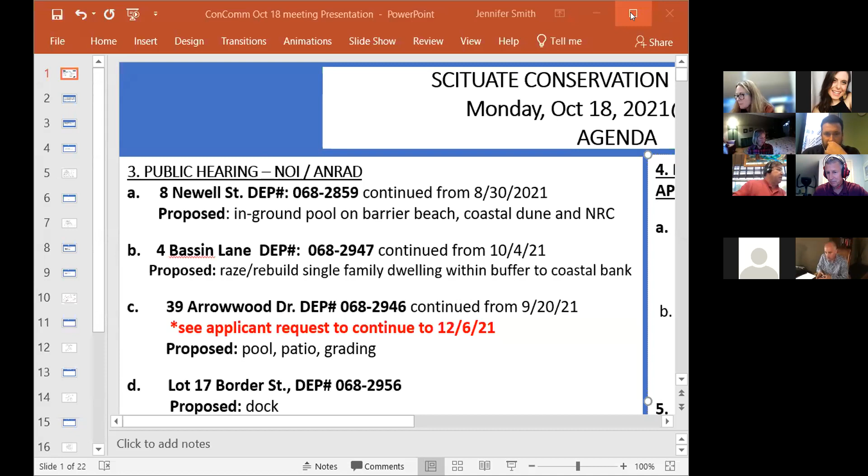Good evening. This is the conservation meeting of Monday, October 18th. For our procedures, on June 16, 2021, Governor Baker signed into law an act extending certain COVID-19 measures adopted during the state of emergency. This act includes an extension until April 1st, 2022 of the remote meeting provisions of his March 12th, 2020 executive order suspending certain provisions of the open meeting law. You're hereby advised that this meeting and all communications during this meeting may be recorded by the town of Scituate in accordance with the open meeting law.

So we need to get an acceptance of the agenda with a couple of additions. When we're all done, I wanted to update you on where a couple of trail improvements and whatnot have been done. Jen Foley, did you want to speak about the Driftway Park piece, or do you want to chat about it some more before we bring that up?

Yeah, we can chat about it. That'd be great, if we have time, if Penny's not too anxious to get off the meeting, we'll give it a shot. I'm very content. I ate my dinner, I had my water, I had my chocolate, so I'm all set.

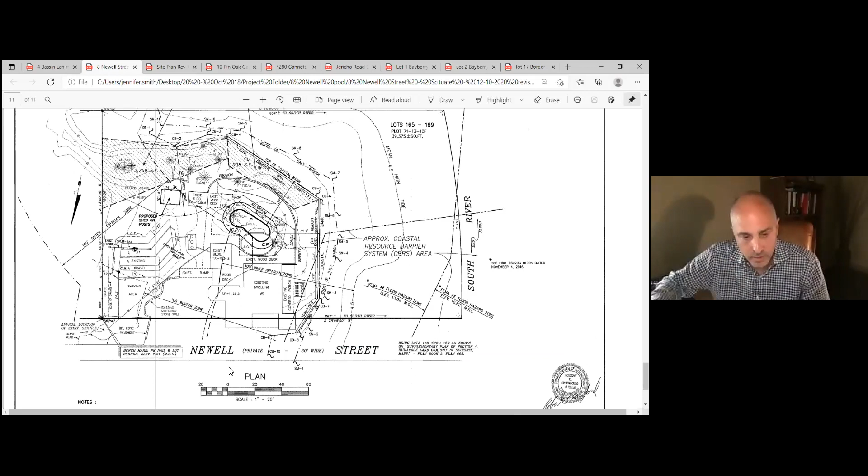Hey Frank, how are you? Good evening, Jeff. I believe, I just want to make sure that John is here, and I know also Chris Wynn, who's my client, probably needs to be promoted if he's not already.

But the thing we'd like to do, Jeff, if we could, is kind of bring this as new news, new information. I think the commission's pretty familiar with the site, so we have a fair number of things to cover tonight. So if we could not do a lot of rehashing, that would be great. Yeah, I'll just kind of synopsize without really getting into any crazy detail, Frank, if that's okay. Until Penny tells you you're done. Okay, yeah, 5 minutes, Jeff.

Right, Penny, thanks. So I'm here with Chris Wynn, who's my client, who you guys know. John Zimmer hopefully will be joining us in a few minutes. Our last substantive hearing on this was May 17th. Since the last meeting, Mr. Wynn submitted a bit of an analysis, kind of comparing this project to some other projects he felt was similar in and outside of Humarock.

In addition, we hired Pat Brennan, who I believe the commission's familiar with, to analyze the proposal for purposes of determining whether a pool is a structure by FEMA standards such that it needs to be elevated, and whether the proposal would have any adverse impacts on coastal storm flowage. Pat addressed that. In addition, I submitted a memorandum addressing some of the legal standards that are at play.

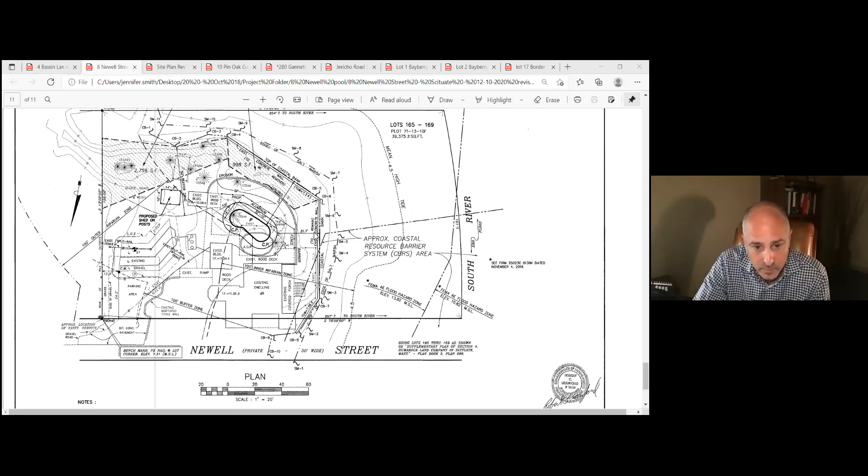But I'm happy to have Mr. Wynn address the commission. Frank, you've had an opportunity, well, all of you have had an opportunity. I just want to make sure you've all seen Mr. Wynn's submittal. I'm not interested in wasting anybody's time, but if you have any questions about it, or if you haven't seen it, please speak up. I'm sure in a 3-minute period you could probably review the whole thing. That's fine. Again, he's an applicant and a resident and he has the right to address the commission. I'm just asking that we don't repeat a lot, that's all.

Chris, anything new to add or expound upon that I haven't covered? Well, yeah, thank you, folks, I appreciate everyone's time. And of course we've had several meetings, so I appreciate everybody's time across that duration as well. Just in summary, the letter was intended to recap where we started and where we ended up from the last meeting. And when we first purchased the property, we did consult with the commission, and the initial guidance, to my own ignorance of the process, was to submit a drawing.

So we took from EET, who's not with us here on the call, the Bob Crawford had the original plan. And as you may recall, we did just put a rectangle, like here's a rectangular pool, not understanding that was going as a starting point from all of that. I think the key thing to note is that there are several pools in Humarock, and there was also a project that was approved this past spring on Peggotty Beach that has substantially the same characteristics of coastal flowage, barrier beach, proximity to vegetated wetlands and other components there, as well as some existing projects that have been rehabbed over the years in Humarock. So that was really the summary of the analysis.

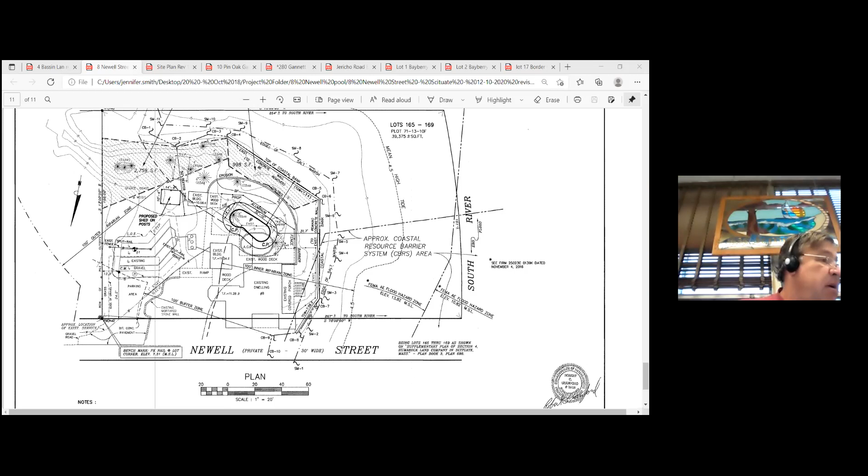Thank you, Mr. Wynn. Before I go to members, Amy, you mentioned a pool at Peggotty Beach. Is that in the same resource area? I just don't remember a pool at Peggotty. No, it's up on the cliff. I want to be clear that's not the same, because we want to maintain consistency. So the one on 58 Crescent Avenue is up on the cliff, but I think the one Chris identified was the one right on the beach itself, behind the public portion of the beach. Correct me if I'm wrong, Chris. Yeah, that's my belief as well. 56 Peggotty Beach Road, that was the one.

Okay, I'm going to look that up. On the notice of intent, it was the item immediately preceding ours at one of the spring meetings, I don't have the date in front of me. It was defined in the notice of intent as a pool in a Barrier Beach, subject to coastal flowage and all the other conditions we've been discussing with respect to ours.

Okay, thank you. Amy, do you want to speak to that, or go to members? We've done both. I don't recall what Chris is recalling. I don't recall a project in coastal Dune on Barrier Beach that's a pool, and each review is a brand new review anyhow. But I think that address you're going to find is actually in the coastal bank.

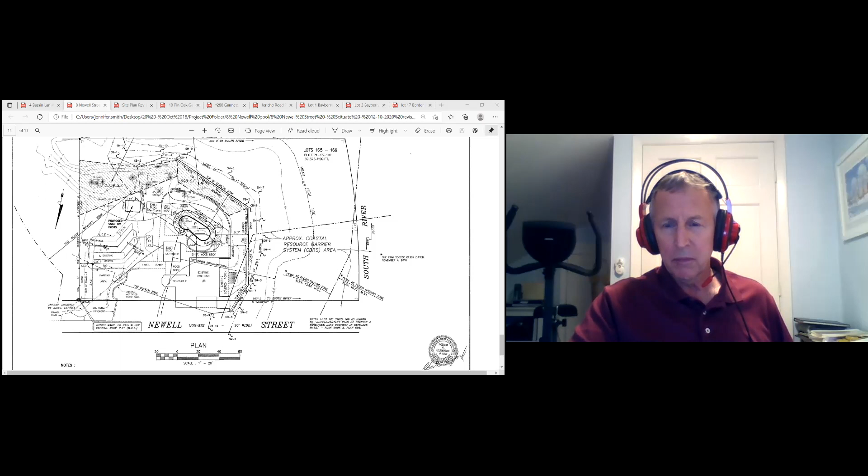Well, just before you do, so I've been out to the site. I've heard Mr. DeLisi, I've heard Mr. Wynn, Mr. Zimmer, and I appreciate all the work they've tried to do to make this possible, and people trying to improve their property. And we always seem to get into a bind between, or in my mind, sort of a compromise with different projects. We have the improvements that they're willing to offer on a site that's pretty degraded. But in turn, they're looking for some relief to put something there. And we've had this discussion back and forth.

We tried to get CZM to go to the site. It didn't work out, but I know we've discussed this a number of times with them. And I think maybe Amy, CZM is sort of an advisory group, but it's more of a DEP regulation. And maybe you just want to cite that if you can.

Frank, did you just say it was a DEP regulation? Well, a DEP ruling or regulation on what can be in and out of a zone, if I'm correct. I don't have the regulations in front of me, Frank, but we're talking about the standard for barrier beach and coastal dune. It's strict that no vertical walls are allowed, because you're not gonna let a wall or a pool, whether it be above ground or below ground, allow the dune to shift and migrate like it's supposed to do. And you don't have the authority to override the DEP rules with your local regulations. You can have local regs that are more stringent, but they don't override the state, so this is actually a state rule, and it's protection of interests of flood control and storm damage prevention.

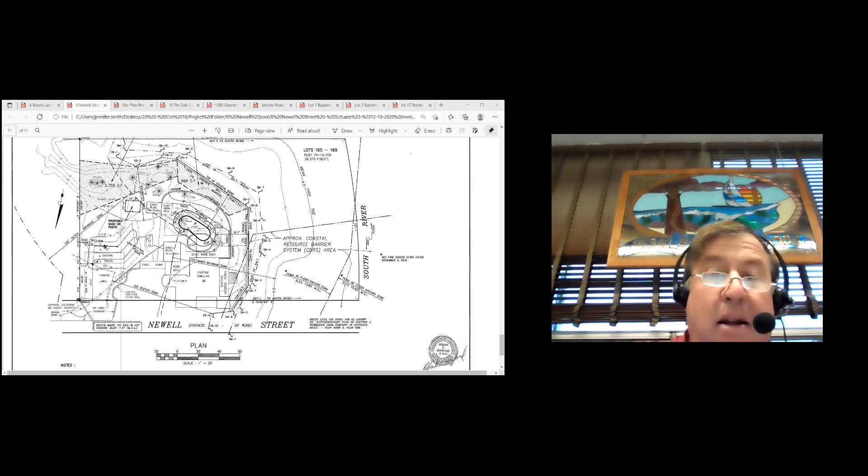I think anytime you have a project with varying discrepancies, getting on, whether it's Mr. Zimmer or Attorney DeLisi, if this were just something that could be permitted, obviously there's not a need for that. But you have much more extenuating circumstances on a site that, although before your time, the previous owner ignored a lot of the regulations. So you've got a site that certainly needs to try to get back into some sort of compliance. And I think the commission's goal in a lot of cases is to work with folks. There's a number of other items at that property that are not in compliance, but what you're asking for is the pool. And we talked about different ways and whether that would be feasible if certain work were done.

I'm not trying to get away from this, but the house that's on Piers on Collier, that's almost a box, does that house have a pool in it? It's up on the second floor. So it's an elevated pool. It's on the second floor of the house. It doesn't touch the ground.

Well, it leaves a lot to be desired, that's for sure. Sure. Well, Frank, I appreciate the thought of looking into what some of these other projects are.

One of the things that Patrick Brennan from Amory Engineering made a distinction of in his letter is there's a FEMA definition of structure, but the word habitable seemed to have been omitted from a lot of the discussion here. A habitable structure, according to Pat and other experts who've provided guidance, is one that requires the elevation, but a non-habitable structure does not.

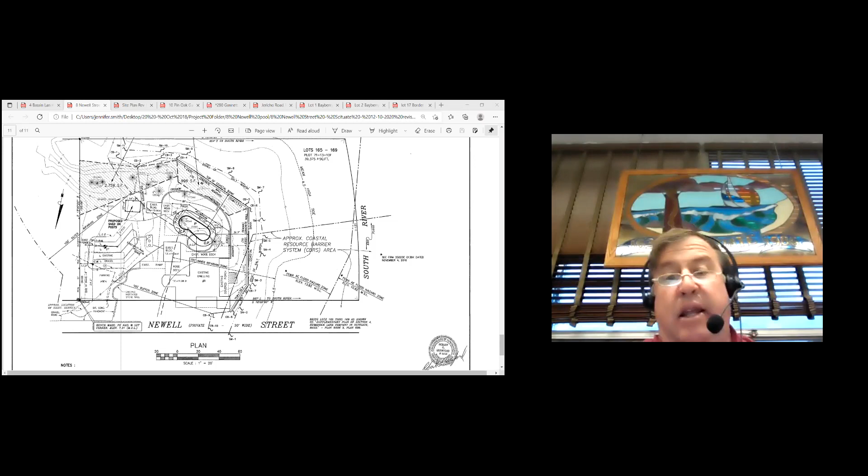I think the document that defines it is attached to Mr. Brennan's letter, so you can just take a look at that. You should be able to see that. And the only thing I can add, and I think we're probably at our end for discussion, but...

If you recall, all that went on with regards to creating a dune to protect parts of Humarock - we had multiple discussions with lots of different agencies, FEMA, CZM, all those different agencies, and we could not build anything other than a dune to protect Humarock. That was the consensus from all those agencies.

When it was talked about whether a revetment or a seawall or what could be done to protect those houses, we kept circling back that the only thing that could be done to protect them was some form of a dune.

And that's why I wrote the letter to basically say, your standard is no adverse impact. When you look at this as a whole, there's not even a question that the circumstance with the proposed in-ground pool versus the existing partially above ground pool, along with all the mitigation, is clearly a better situation. Clearly.

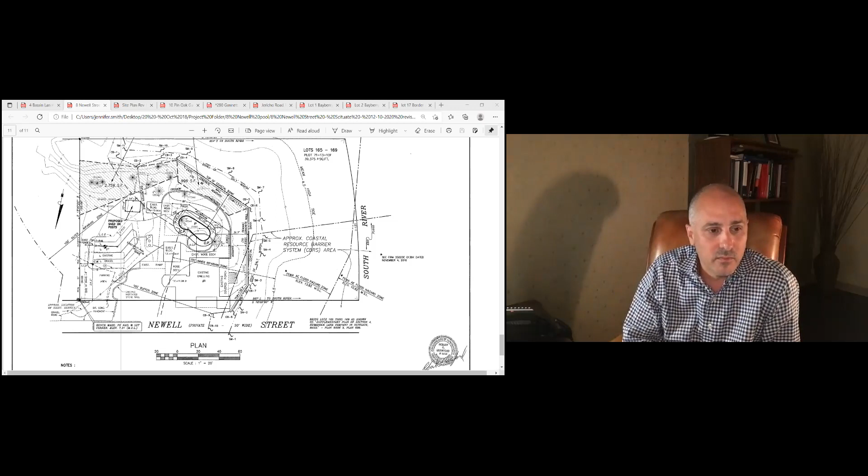It's exactly what your regulations are designed to protect. So that's why I encourage the board to look at it through that viewpoint.

And I get that, Jeff. And just as when we look at houses in Humarock and we allow people to pave, we only allow them to pave in places where there was pavement before. So for Mr. Wynn to come back to the commission and say, well, I've got an above ground pool...

Now, a lot of those driveways in Humarock were probably never conditioned, nor do I believe this pool was conditioned. Never. But I don't know that we've ever looked back that far, but I don't think if you had found it being conditioned by a Concom, I think you would have given it to us.

Yeah, I mean, I'm not sure you guys existed in the early to mid 80s, so there was a commission. I was a teenager driving by on my boat at the time, and thought how cool it was that these people had this property. But that, sure, yeah, no I get it, Mr. Wynn, and I do appreciate what you're trying to do here. So, all right, I do think we've given this as much time as we can.

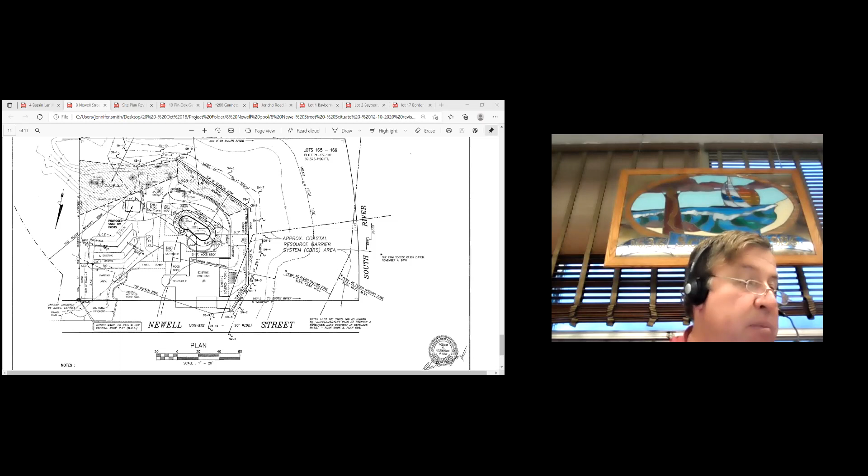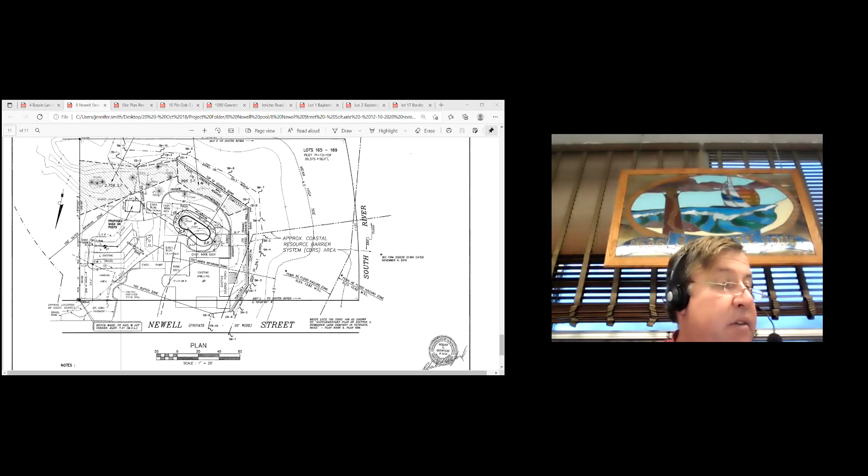So I'm looking for a motion, I guess, at this point. I make a motion to close. Do I have a second? Second, from Jen Foley. So all in favor? Doug? Yeah, I think we should close. Yep, okay. Andy? Yes. Brendan? Yes. Frank? Yes. Okay, all right, moving on, we've got a lot of things to think about here.

Okay, thank you very much. Thanks, Jeff. Mr. Wynn. Okay, Bassin Lane, 4 Bassin Lane. And so we met at the site, and I think we have a revision. I don't think, do we need anything else on this to close? Anybody want to speak to this after our meeting? Yeah, you do, you need to, we need to have more. I'm looking for Jeff Bassett or Greg or James. I'll unmute Greg. Greg, good evening. Greg, hi.

Excellent. Yeah, for the record, Gregory Morse, registered engineer, representing K&E Construction, the applicant. As you know, this is a continued public hearing for the raise and reconstruct of a home at 4 Bassin Lane. Since the last meeting, we performed a site walk with CZM, as well as submitted a revised plan to this commission. The revised plan essentially addressed 4 things. The top of coastal bank delineation was changed as a result of that meeting with CZM. We previously had it further to seaward, but CZM suggested we move it to the top of the embankment. So we've revised that on the site plan, and accordingly, the 50-foot and 100-foot buffer zone to that bank.

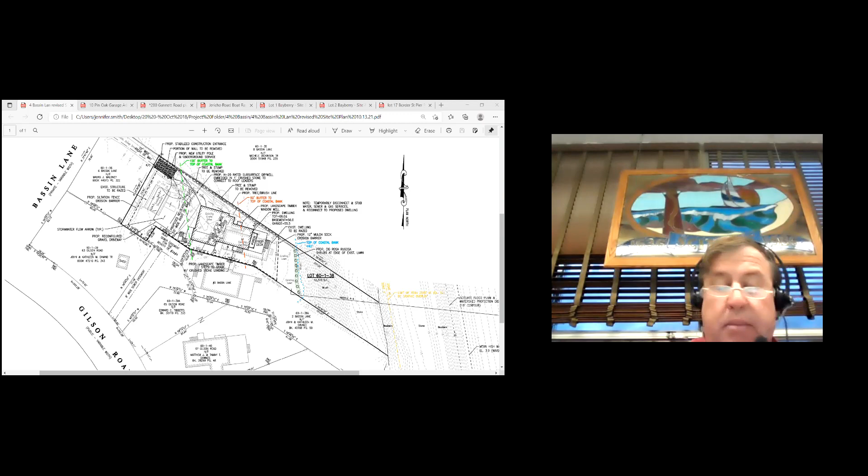Thanks, Greg. Penny, Amy, do you want to comment after that? Yeah, sure, real quick. So like Greg said, we indeed did have a nice site visit with two of the regional officials from CZM. And one of the things we observed, and the reason why the coastal bank was moved up, was that there were pretty significant sloughs on at least one side of the property, on the right side, which we also have photos demonstrating, you know, when that happened, from an abutter. And also that part of that there's a double revetment down on the bottom, and that the coastal bank is also primarily vegetated with Japanese knotweed, which is not entirely deep rooted. So that's to be noted.

CZM definitely was concerned about the cliff. That was my take, that they had some concern - it's happened and it happens without notice, so it could happen again. Any vibration or hard overdigs for a foundation should be minimized or avoided.

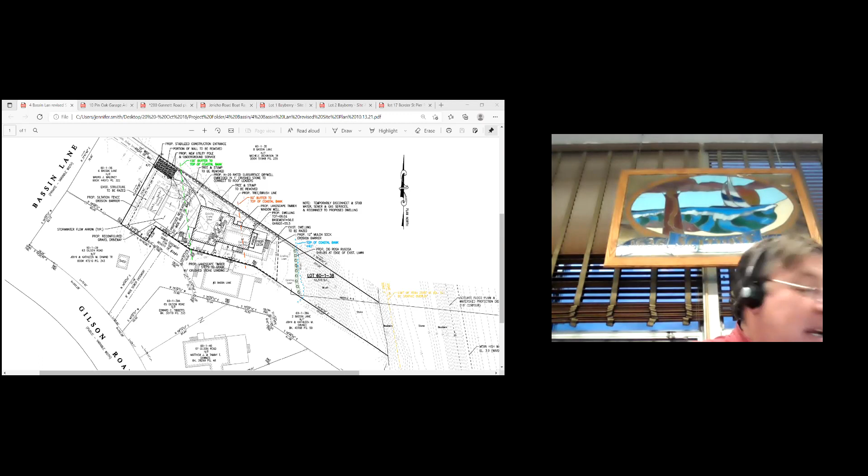Okay, Andy? No further questions for me right now.

Okay, Jen? I'm thinking through the land court stuff and how, without that being finalized - not to get ahead of ourselves - but we wouldn't want to close on this because that could have a material impact on the plans.

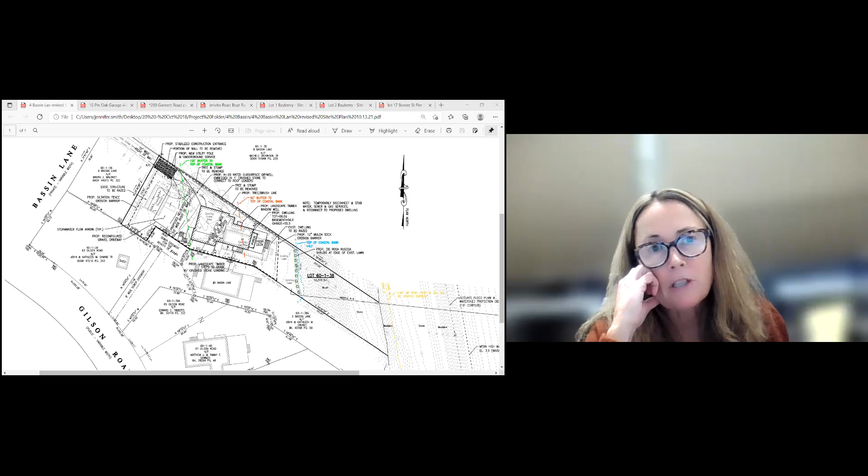Is that kind of correct at all, Amy, or what's the impact on it? I think that it shouldn't stop us from closing, but if plans change as a result of the outcome of the court case, then they would have to come back to us. Got it, okay.

Penny? You were there? I was out there too, and I'm glad to see the Rosa rugosa get rid of the knotweed at the top of the cliff there, which will be good. And the erosion barrier - I think, Frank, you made the point.

It's very, very important that no vehicles go beyond that, anywhere near the edge of the cliff there, that they stay on this side of the erosion barrier. But otherwise, I think it looks good. I like what they've done. And I thank you, Greg.

You're welcome to expand on that a little more. If you wanted to potentially add a condition, we could put an orange construction fence along that side of the erosion control barrier too, as just an extra protection.

Yeah, we just don't - I know Frank was concerned, and I was too, that no vehicles, not one truck turns around past that erosion control. That's almost like sacred ground. You can go out there and plant, but other than that, nothing heavy. So I think that's a good idea to put the fence up. Thank you.

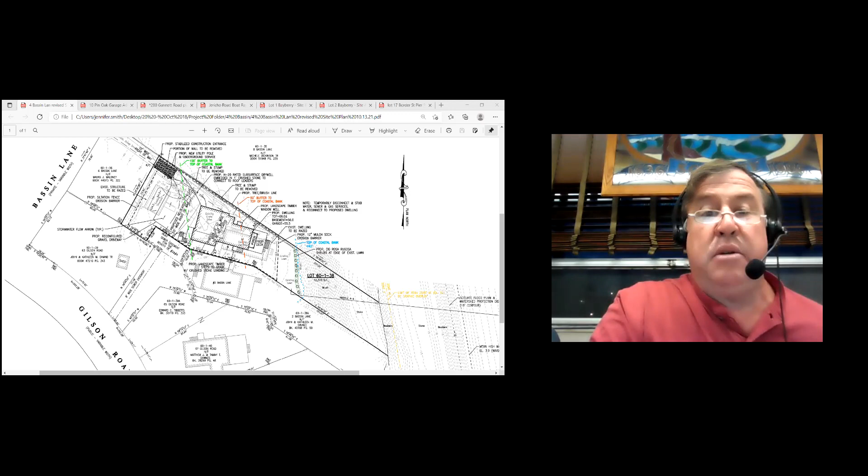Or, I mean, it's a dirt foundation, there's no foundation underneath it, but that's fine, as long as you're aware of it. Yeah, no, again my observation was a concrete block foundation, but I don't know about the entire foundation, just the area we walked around, that's what I noted.

The piece of the easement, so we can't condition a project on someone else's property, but just explain the easement to me, Greg, or to the commission. Sure, so there's a right of way that comes onto the property, which contains access rights.

It also has utility rights in it. My client has filed with the land court to relocate that right of way and easement. That would include relocating the physical utilities to within that new location. We depict that new location on the site plan. So while there might be a temporary cut in the power to the house, it would certainly be reconnected, and we'd certainly be talking with the neighbors and discussing that when that work takes place. But no work that I see would be required on the neighbor's property to accommodate that. It would all be done on this subject property.

Okay, can I interject here? As far as there's gotta be work done on my property, I have underground service. I don't wanna chew on a bone here, but that doesn't answer my question, as far as I have to have power to my meter. That's gonna be dug all the way up. I'm missing something here.

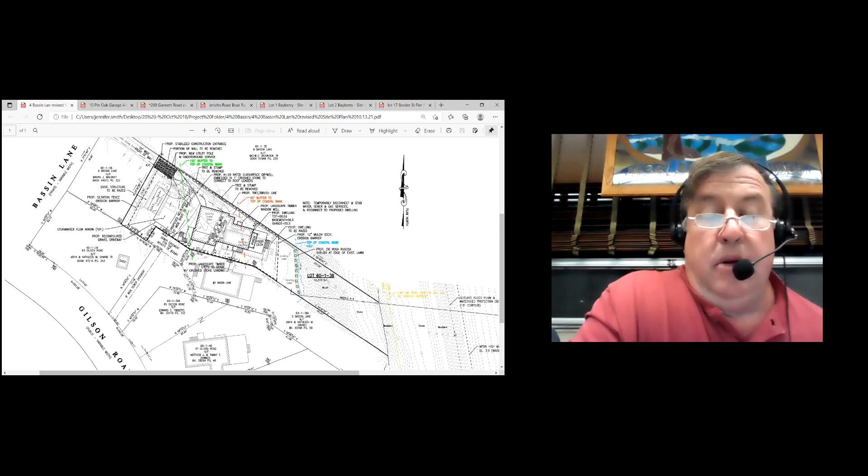Does that help? No, it explains what's going on, but I appreciate it. It seems like, Greg, at some point it would be good for you to be talking with the people that are building this, to work it out.

Yeah, I'm retired and I'm at home all the time, so... I'm not saying anymore, okay. All right, well, no, we want to make sure we address those pieces, and Frank, Greg said the electrical is gonna come through the proposed right of way.

So that goes through, and that comes into probably about 50 feet from where my electrical box is. I'm not assuming, because I know better, how is it gonna get from my property line to my meter? Greg: it'll get cut and redirected right along the property line between the two properties. Okay, so they're gonna dig it up and bring it up to my meter on my property?

I don't think they have any intent to come onto your property and dig it up to your meter. I think their intent is to cut it at the lot line on their property and then redirect it to the power source, not to come onto your property and touch your electric meter or dig up your lawn in any way. Okay, that explains it.

So they're gonna redirect it down to the right of way. Correct. Okay, so thank you. Okay, thank you very much.

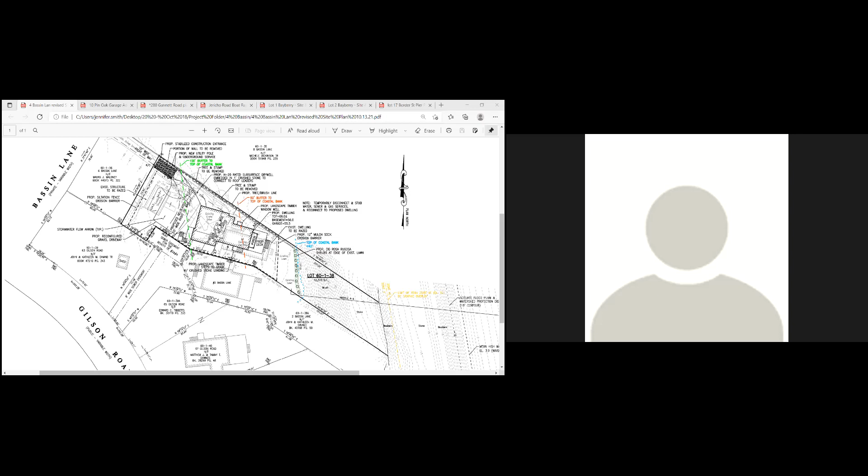Okay, well, unfortunately, the purview of our commission is really to deal with the Wetlands Protection Act and the drainage, things like that. I could see it's a tight site, just going in and out with a pickup or a van, so I know that they're going to have to work at that. I think they're aware of what they have to do there, and if it's the only access into that property, I'm not sure what their alternatives would be other than just to be real careful with that.

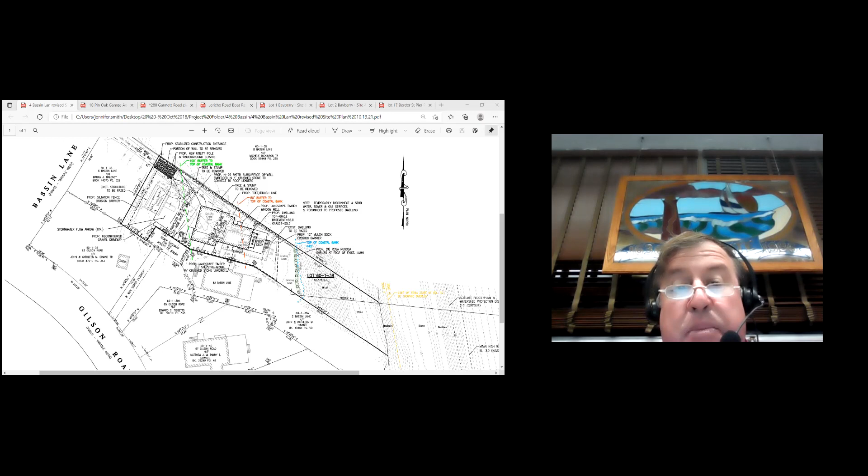I don't know how else to answer your question. They have to put down a stabilized entrance, and we want to make sure they're not bringing mud and whatever. I get your concern, but I got to believe they're fairly aware this isn't going to be an easy project. Okay, thank you.

Do we have anybody else? Okay, do I have a motion? I make a motion to close on 4 Bassin Lane. That's Penny. How about a second? I'll second it, Doug's going to second. All in favor? Jen, yep. Andy, yes. Brendan, yes. Frank, yes. Thank you.

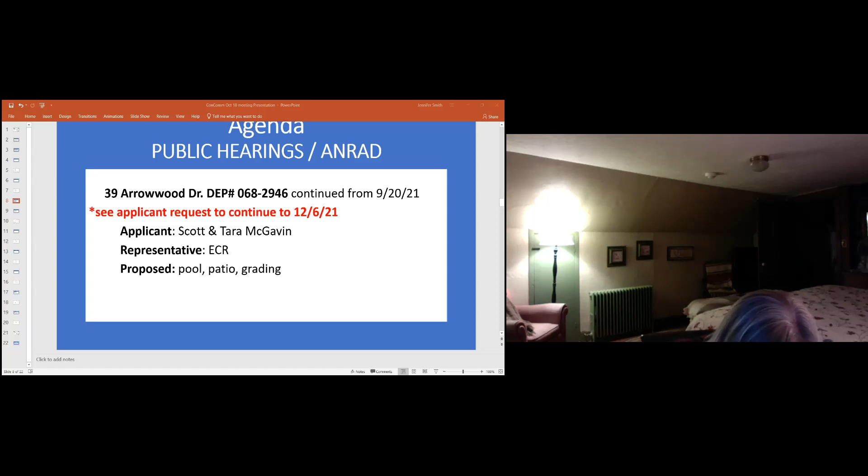39 Arrowwood, we got a request for continuation. Motion to continue 39 Arrowwood to December 6th. We have a second? Second. All in favor? Jen, yes. Andy, yes. Brendan, yes. Frank, yes. Great, thank you.

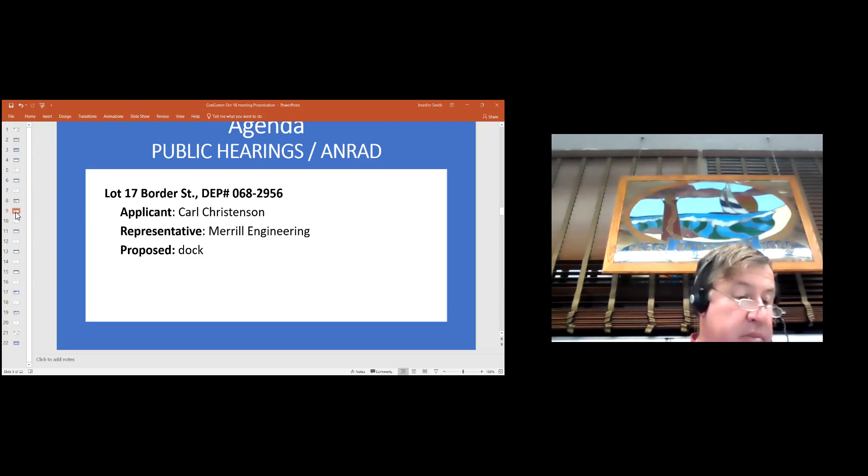Lot 17 Border Street. So I'm assuming you're gonna open it, Doug. Oh, we need to open that one, and Doug's gonna recuse himself from that. Why? It looks like the representative is Merrill Engineering. Oh, that's a good reason. Unless you think you can do that, it's up to you, Doug. No, I should probably. Who's the representative? I'll go by that. Dana. It's Dana. Oh yeah, I better recuse myself on that. Okay.

So on October 18th, 2021 at 5:30 PM, the Town Hall, Scituate Conservation Commission will hold a wetlands hearing under Chapter 131, Section 40 of the Massachusetts General Laws and Section 30700 Town of Scituate Code of Bylaws regarding the application of Carl Christenson for work related to the construction of a pier at location Lot 17, Border Street, Scituate. Abutters and other interested parties are invited to attend. Information and access to the virtual meeting is available on the agenda posted on the town website.

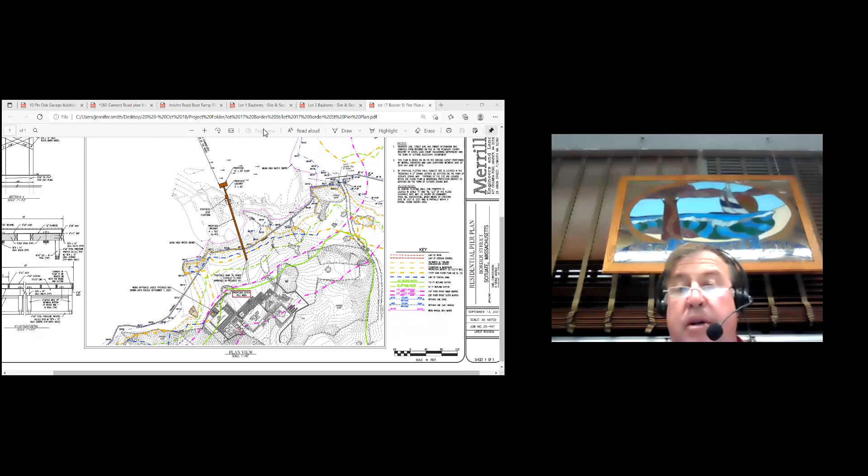Good evening. Frank, I'm gonna unmute Dana Altabello. Dana, you can let us know if you need anybody else to unmute too. Sure, thank you. Actually, the applicant Carl Christensen and his attorney Adam Brodsky are both on the call as well. Okay, give us what you're gonna do. Dana, do you want to briefly explain the project?

Absolutely, thank you. Good evening, my name is Dana Altabello. I'm with Merrill Engineers and Land Surveyors. I'm here with the applicant Carl Christensen, as well as his attorney Adam Brodsky. This project is located on the westerly side of Border Street, on a property that was previously a portion of 143 Border Street. The property has over 900 linear feet of frontage along the Gulf River and consists of approximately 17 acres. Much of the area along the river contains wetland resource areas associated with the river. The wetland resource areas in this part of the property were reviewed recently as part of the house construction associated with SE 68-2912, which was approved previously earlier this year.

The site does contain bordering vegetated wetlands, salt marsh, FEMA flood hazard area, as you can see shown in orange, and the riverfront areas are both shown in purple as you work your way into the site. The 100-foot and 50-foot buffers to the top of bank are shown in green as you work your way into the site.

The applicant wishes to construct a water-dependent pier with an elevated timber walkway, an 8-foot by 6-foot platform, and a 3-foot wide aluminum gangway with a 10 by 20 float at the bottom. The 4-foot wide elevated walkway is approximately 150 feet long. There will be 2 by 6 decking along the walkway, spaced 1 inch apart to allow sunlight to penetrate the ground and salt marsh below.

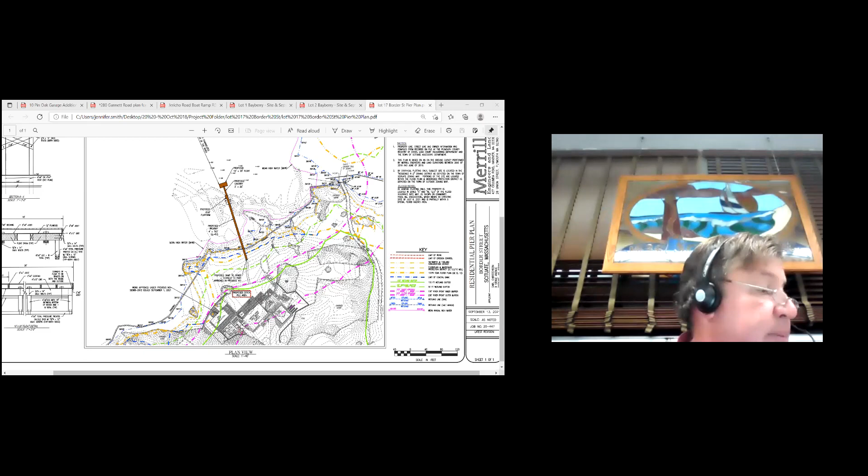Is that dock at the end, is that removable in the winter or does that stay out there all year?

The float itself would be removed in the winter, and the gangway is usually brought up on top of the pier itself, secured up there so it's not dragged across the salt marsh or anything like that. And the float is floated down to a boat ramp, I believe was the intent. Carl might be able to speak more definitively on that, but I believe the intent was to head down. I'm not exactly sure where, but I think it was to be removed at a boat ramp or something like that, where it would have less impacts and easily could be gotten out of the water.

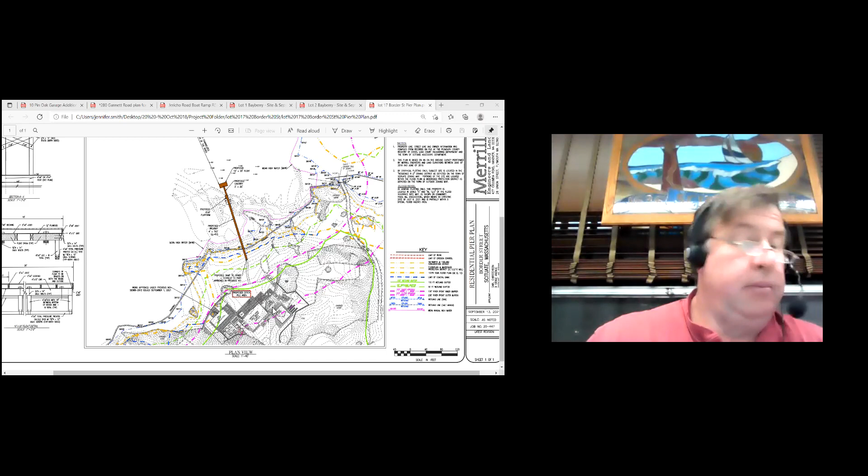I think someone may need to unmute, Mr. Yeah, I just asked him, do it again. Okay, there we go. I think I'm unmuted now. You got it.

So the intent is Keith from Harbor Moorings is going to do the construction of the dock of the pier, and the intent is to have him remove it every year. And I think he does a number of similar projects down on the river, so he's very familiar with how to get them out safely and how to get it stored. And I have other places I can store it once we get it out of the water.

Okay, thank you. I know some people will bring theirs up on their property somewhere, and I believe we've had orders before where we don't want the dock or the float left on the marsh. If it's brought up onto upland or out of the marsh area, it's been okay to keep that on the property, but yeah, I don't want it on the marsh either.

I think the easiest thing is if you look on the right-hand side of the drawing, there's actually a cart path that goes down there. Get it out of the water, bring it up the cart path, and then there's a pole barn farther up near the main barn that I can store it in. That's my intent, so I'm going to talk with Keith to make sure that's all feasible and possible, but that's the plan. Great, thank you.

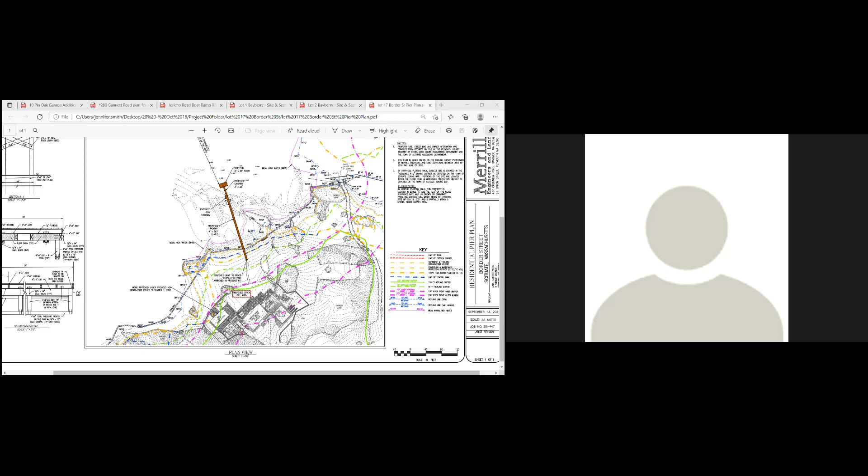Do we have anybody in the audience? Seeing none. Well, I guess we'll let you go on your journey. I think there's a few more steps in the process, but okay.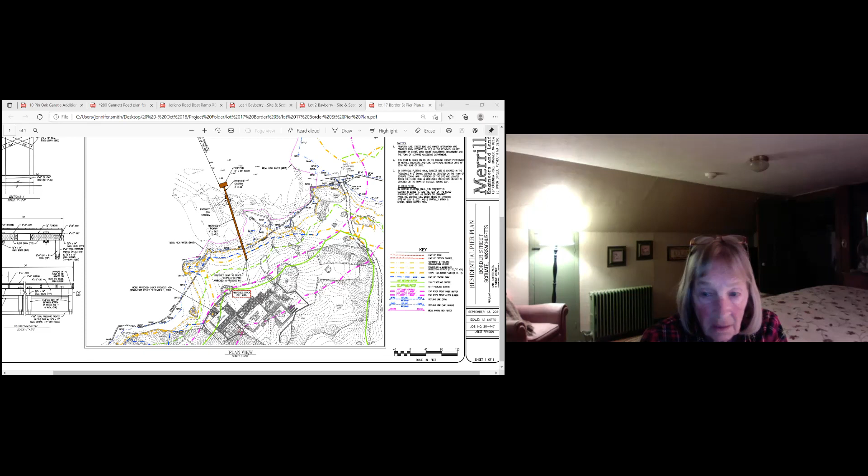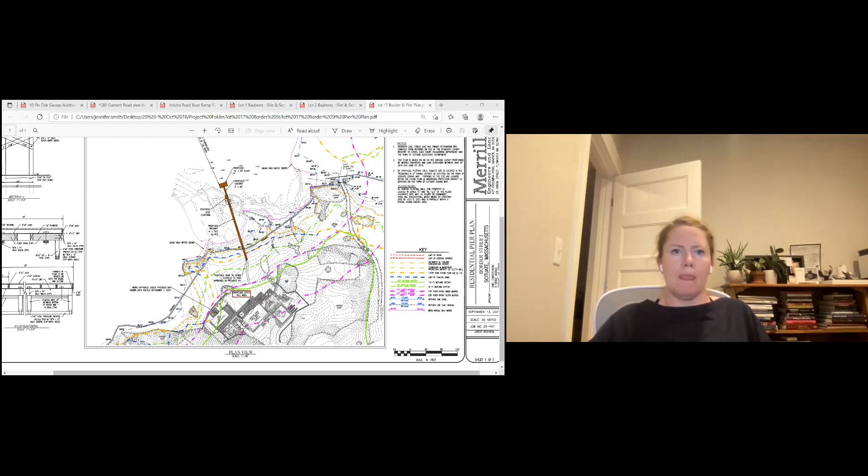10 Pin Oak Drive. On October 18th, 2021 at 5:30 p.m. in the Town Hall, the Scituate Conservation Commission will hold a wetlands hearing under Chapter 131, Section 40 of the Mass General Laws, and Section 30700 of the Town of Scituate Code of Bylaws, regarding the application of Daniel Kelleher for work related to construction of a garage at 10 Pin Oak Drive, Scituate. Abutters and other interested parties are invited to attend. Information to access the virtual meeting is available on the agenda posted on the town website.

Good evening. I'm going to unmute Greg, or I also see James, but I guess I'm going to go with Greg. So hold on.

Good evening, Greg. For the record, Gregory Morse, registered engineer, Morse Engineering, representing Daniel Kelleher, the property owner. This is a notice of intent to allow construction of a 24 by 26 foot garage addition and reconfiguration of the driveway at his property located at 10 Pin Oak Drive. This notice of intent is very similar - we filed the same exact project in 2018. The permits have expired, however, and the project was never commenced. There were no changes between that former approved project and the project before you tonight.

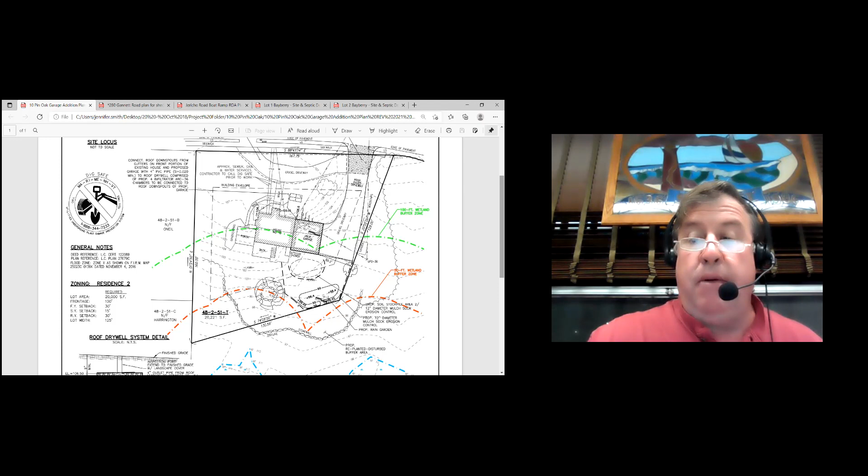Well, the special conditions basically were: the driveway is permeable, additional plantings should be installed per direction of a wetland scientist and the conservation agent, planting plan, and we do have the planting plan. The intent is to add diversity to the grass swale over at least 2 growing seasons. And there's an O&M plan, no runoff shall leave the staging, silt sock, stockpile area.

Just kind of like the general stuff. Testing of soil to make sure there's a minimum of 2 feet separation of groundwater, to confirm infiltration rate and further evaluate soil conditions. If soil varies, an alternative plan may be required. And then conservation posts.

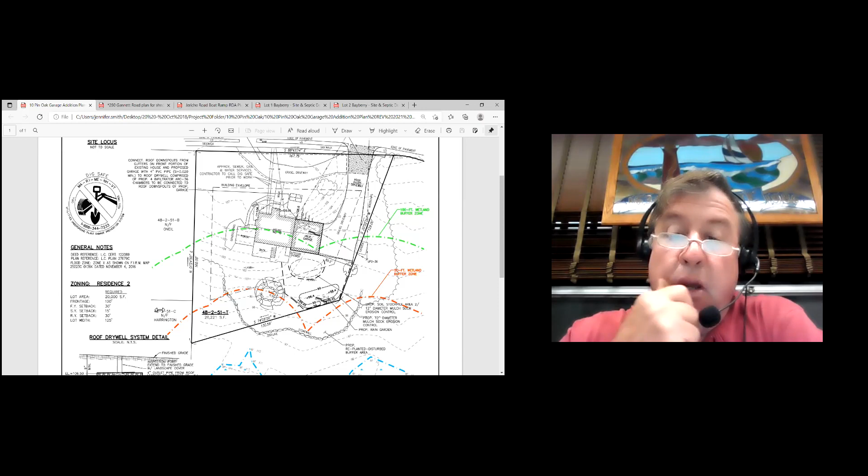Okay, I do remember going out with this. I remember meeting Pat, and there was some, I guess, inadvertent clearing at the time. We figured out where the wetlands line were, and I know they did stabilize some of that at the time, and then we had this hearing. It's too bad they had to circle back to this again.

But okay, we'll move to members. Doug? So the proposed replanted disturbed buffer area, Amy, that's already part of the orders that we would repeat, that has to be planted, and if it's already been planted, then that part's just done.

Yes, although I don't think it was. I don't think anything was done, honestly. But Greg, maybe you can help us with that. The barren soils that were out there were stabilized, but the shrub plantings were not done. Those would be done under the new order.

And the rain garden, that's already included in the order? That was part of the original order, and that would remain in this order. Yes. Okay, no, that seems pretty clear then.

Penny? No, I'm good. Jen? Yep, all set. Andy? I'm okay. Brendan? I'm good. Do we have anybody in the audience for this? No.

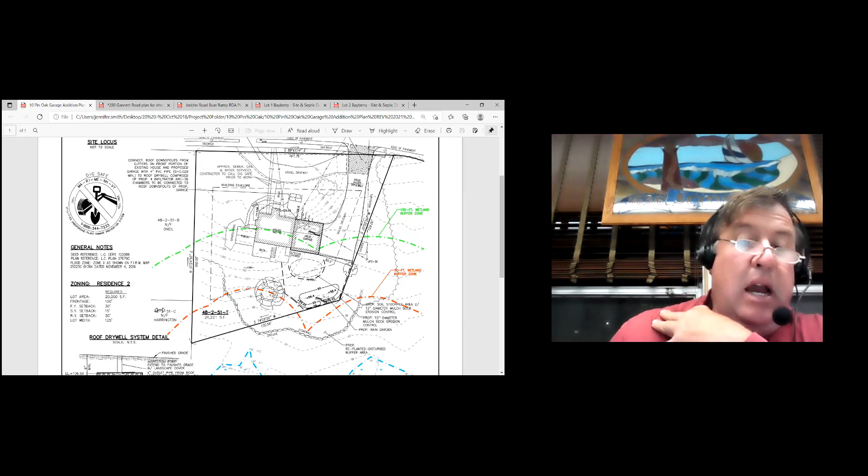So, Amy, do we have to issue another set of orders? Is that the plan? Yeah, actually it kind of reminds me of some projects you might be very familiar with that never got recorded. It's the same orders.

I don't think I'll change anything but the dates, really. Okay, so unless Greg, you think maybe... Yeah, Greg, maybe you can remind the applicant to get these recorded. Yes, I will. Get those into us right away.

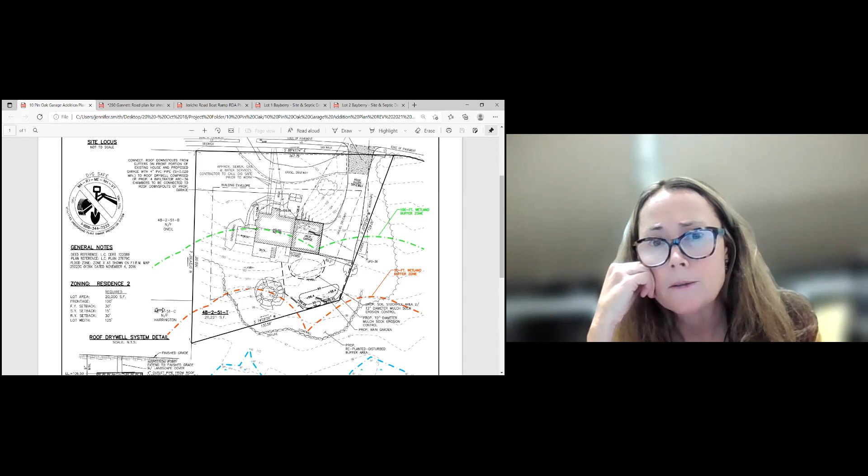Because I know the contractors never get their own project done, what's the most amount of time we can give him for the project? It seems a shame. 3 years is a good amount of time, and then you can file for a request to extend the orders. 3 years just never seems long enough when you're working on your own project. But all right, we'll start there.

And we didn't have anybody in the audience, right? Nope. So I'll take a motion. I make a motion to close 10 Pin Oak. And Amy, we don't have to redo the stormwater, right?

No, I think it appears that the stormwater would stand since the project is the same. I mean, I would like the plan to reflect the shed and be accurate. Okay. Greg? I'll gladly add the shed. It's well outside the 100-foot buffer zone, but I will add it to the plan. Thank you. Okay.

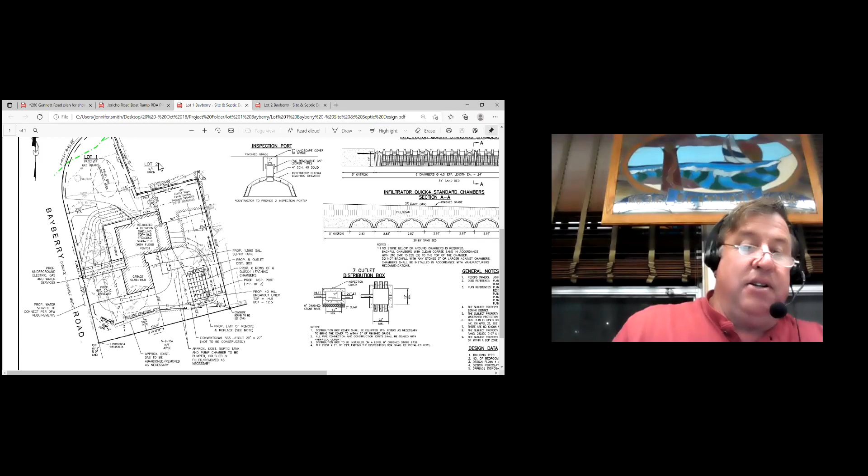As just read into the record, this is for property located at 14 Bayberry Road, lots 1 and 2. The existing property as a whole was about an acre in size, has an existing home on it, number 14 Bayberry Road, has a detached outbuilding, has a pool on it. It's developed with a driveway, lawn areas, on-site septic system, and utilities. The applicant recently went before the planning board to divide that property into 2 lots, lot 1 and lot 2, each being about half an acre in size.

The plan on the board in front of you right now is lot 1. The proposal is to pick up the existing house and relocate it onto lot 1. You can see the property line, the black line in bold, centrally located on the lot. You can see the proposed location of the house, and in a lighter gray line, the location of the existing house, which you'll notice goes across that lot line onto lot 2. So we would be relocating the house again to that new location.

The wetland resources are located on the opposite side of the street off of Bayberry, at the top of the page, there is a salt marsh behind the homes on the opposite side of the street. The 100-foot buffer zone to that salt marsh extends onto the property, shown as the green line. The remaining area of the lot, the majority of it, is located in the FEMA floodplain, at elevation 15. The topography on this lot, at the low point, the north property corner, is approximately elevation 8, while the southern boundary at the bottom of the page is approximately elevation 16 or 17. So the majority of the lot is in FEMA zone AE.

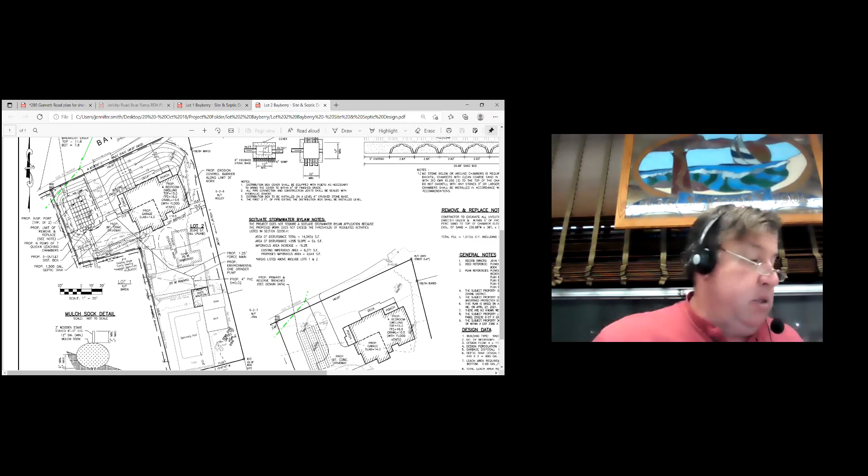Thank you. Amy, do you want to comment on these to start with? Yeah, I do.

Well, this is a project within 100 feet of buffer of BVW for salt marsh and land subject to coastal storm flowage. I guess the general comment is that there's a lot going on here, so much so that I'm a little unclear as to whether there are any retaining walls or infiltrators proposed for roof drains. And then the fill, I mean, they're building it up.

So on lot 2 it goes from elevation 9 in the street up to 14. Is that what it is? Yes. So it's going up 5 feet, and lot 1 goes up to 17. So there's quite a bit of fill coming onto the property, as you know, because we come across this quite often.

But DEP does not have performance standards currently for land subject to coastal storm flowage, although they are pending, and reliable sources tell me that the stormwater handbook and land subject to coastal storm flowage will come out simultaneously, released for comment this fall. I don't know if you've heard that update, but anyway, without it, you go to our local regulations, and you do have some guidance with that.

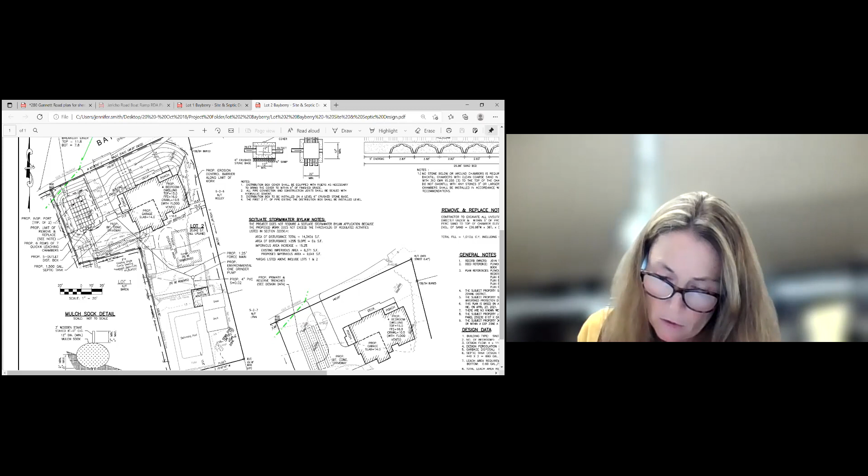And we've had experience with these types of homes before, and we've tried to work through to get the best project that we can, given the regulations that we have in place. I think that's my basic comments. Okay, thank you.

Jen, this is your neighborhood. Thanks, Frank.

Yeah, when I first saw this come across my email, I was confused about where it was, just because I didn't know there was enough space for this. And like Amy highlighted, there's so much happening that it's a bit hard to follow.

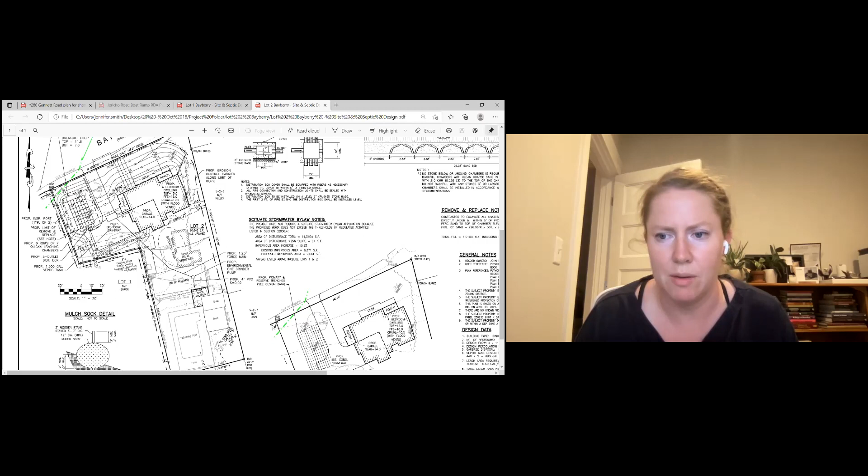I think I'm okay for now, but I'll probably have something when I hear other people's questions. Okay. Andy?

Actually, let me switch to Doug for a second. Yeah, there's a lot going on here. That would be helpful, so let's get an engineer's perspective on this. Not that everybody doesn't have good ideas, but... No, I was going to suggest that, Frank. I appreciate it.

Thanks. So just for the record, it is a busy plan. No pressure, Doug. Yeah, no kidding. Just for the record everyone, I'm not a professional engineer, I just play one on TV. Well, there you go, there's a lot of other people that kind of do that stuff.

So there are a few retaining walls to pick up the grading that there is in there. Essentially, though, it looks to me - I can put this in the form of a question to Greg - but it looks like you've got everything grading towards the street. So the concern to me, based on other projects we've had that are similar, is that the abutters become very concerned with any lot fills in these smaller lots having an adverse impact on their property. So I would imagine something similar would be in this case too.

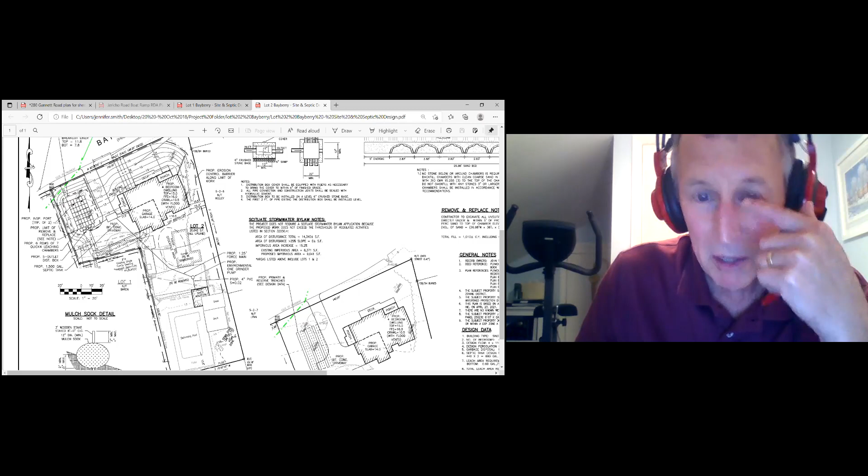But it looks to me both lots have some retaining walls to take the curse off some of the grading, but it is filling from the street up to the house to elevate the house up to those elevations to get out of the flood zone. But then they've got a retaining wall to end that grading so it doesn't wrap all the way around the lot and shed water towards the abutters. Is that kind of the basic drainage pattern you have, Greg?

It is the basic drainage pattern we have. Yes, we're draining from the house out to the street. There are a couple of small retaining walls off the corner of the house and along the edge of the driveway on this lot, as well as a retaining wall off the corner of the house on lot 1. But it's not a large, extensive wall system.

On this one here, you see the northwest corner - there's a small wing wall that comes off the corner of the porch and the house. The purpose of that is so you don't have to bring the fill all the way around the house to the backyard. It helps limit the fill, and it makes it so you can have a free flow out of the basement for flood purposes if it was to flood.

Yeah, correct. And I was looking for the perk rate here - would the soils be suitable for... well, of course it's going to be in fill. But so proposing - somebody mentioned some roof drain dry wells, infiltrator systems - would that be appropriate for this site?

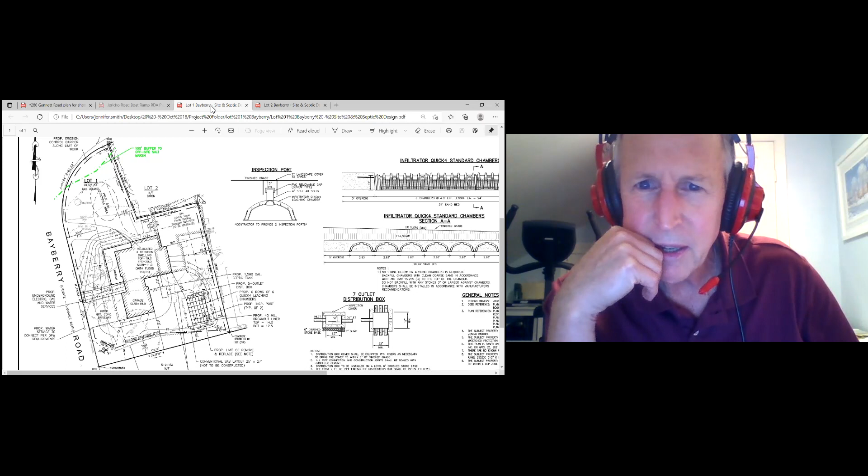But other than that, I think you've designed this in a way that you're doing the best you can to keep water from shedding off onto the immediate lots around this.

All right, so I'll stop talking. Okay, thank you for your input.

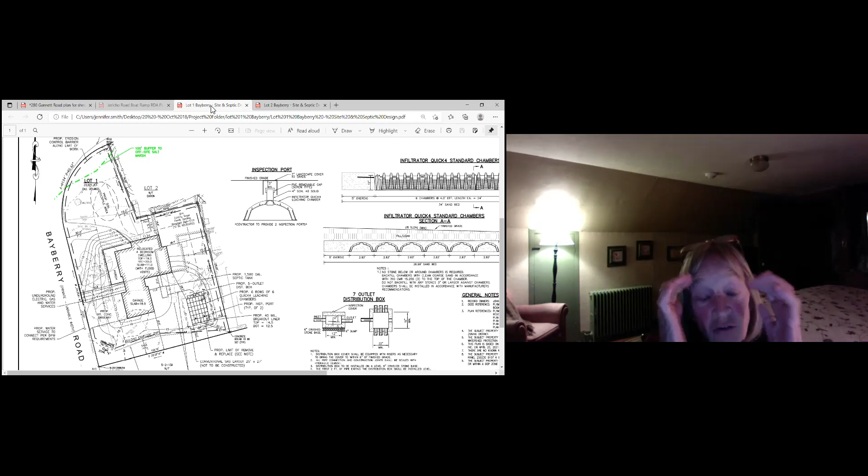Penny? Yeah, we've conditioned a bunch of houses down here. They happen to be on the other side of the road. And those houses, because of the 50 foot, they were all put up on piling. So that alleviated the need for any fill to come in. There was no basements. They're up on piling so the water can free flow. My concern definitely is how much fill is coming in here.

I guess it'll be all right if it flows back, because the houses across the street, all of them are up on pilings. There's no foundations, to my knowledge, on that side anymore. But I'm concerned about the amount of fill that's coming in here, and to make sure that the street is not flooded because of the fill and the slope.

Yeah, it's almost too bad that they just didn't put the houses up on pilings here and left the land the way it was, so everything could flow as it has been. But that's my concern, and I'm sure the neighbors are a little concerned, and hopefully they put in drainage for the roof runoff to help there. But I'm not crazy about all this fill. That's a lot of fill coming in. Okay, that's my 2 cents, Frank.

Okay, thank you. Andy? I think my questions have been covered now. Brendan? Yeah, I'm all set right now.

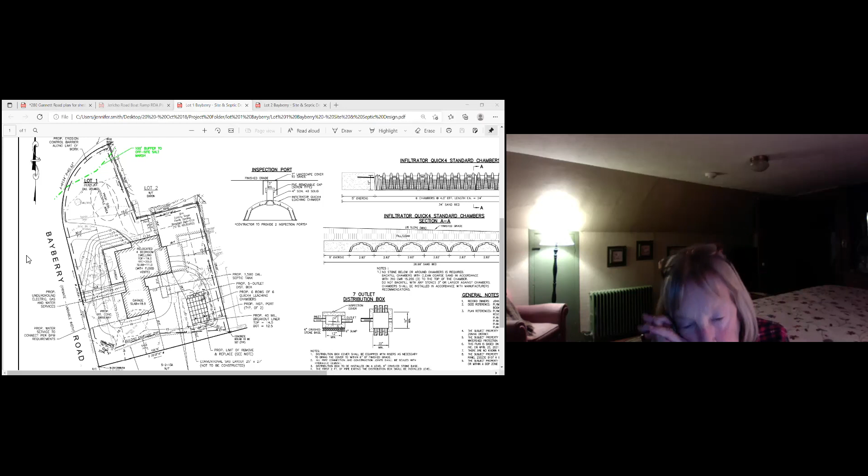And I'd say that the road is wet 11 months out of the year. Yeah, and I'd say in the entire winter, there was a significant amount of ice on the road. So we're just... it makes for a difficult situation when every day you're going through ice or huge puddles. And if it's going to...

Do we have any other? Anybody else with an interest? I don't see any other hands up.

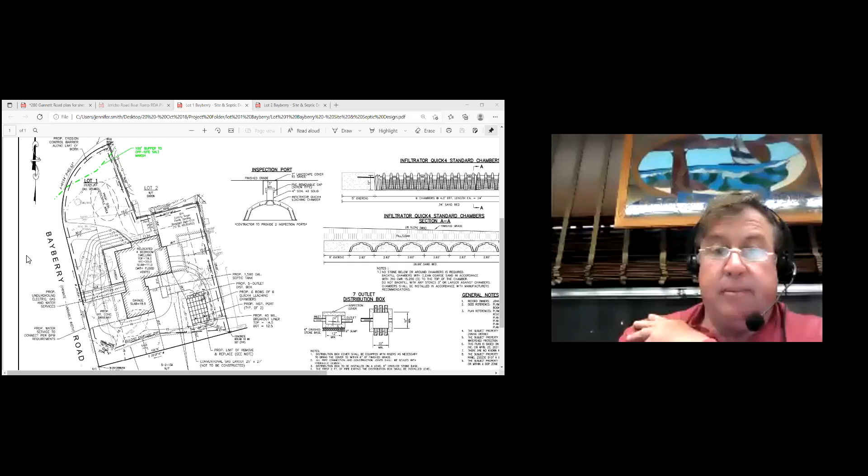So, Greg, you've obviously heard the concern starting with Doug, the sloping to the road. We know that we conditioned these other ones. Some of the water in the road rises underwater. It probably did today. So some of it's flooding from the marsh, but now you have these lots developed and sloping towards there. You said that you had some pretty good perk rates, so it seems like they could take some infiltration.

Just looking at lot 2, everything slopes right to Bayberry Road. Yeah, if I'm not mistaken. Correct, that's the entire lot. Is there any way to create some sort of swale or collector in the corner of that property? There is, the entire lot as it exists today all slopes to Bayberry Road.

And so, where the flooding occurs, you kind of think of flooding in two different aspects on a property like this. One is with respect to the ocean and the FEMA floodplain. If we're getting flooding on this property because of that, the road's underwater. There's already water on the neighbors' properties and across the street because that's the source of the water. We're not adding any fill that's going to displace that floodplain and push it onto abutting properties, because the abutting properties are already underwater at that point.

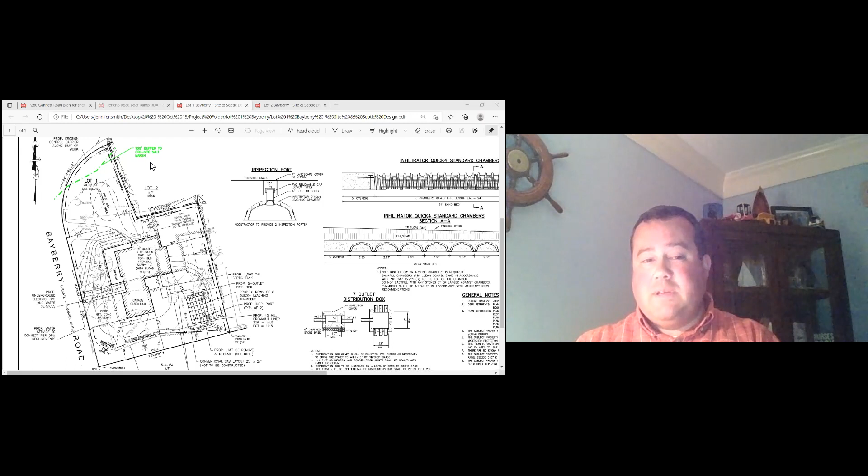But are there things we could do to try to help it? There certainly are. We could try to hold back some of the roof water in dry wells. We could try to grade in a depression or two to certainly help the situation. Nothing's going to help with the ocean effect flooding on this property, but certainly the stormwater generated by this property, we could help by doing a couple of those measures.

And all the other outbuildings on lot 2 are all going to remain. I'm assuming this garage and shed, the deck, the swimming pool, that are all associated now with the existing house, they're all going to remain.

So the immediate one right next to the language that says lot 2, that one is to be demolished. But the remainder, the garage there, yes. But the remainder of the sheds and the swimming pool at the southern end of the lot, the bottom there, that's all to remain, yes. I see. Yeah.

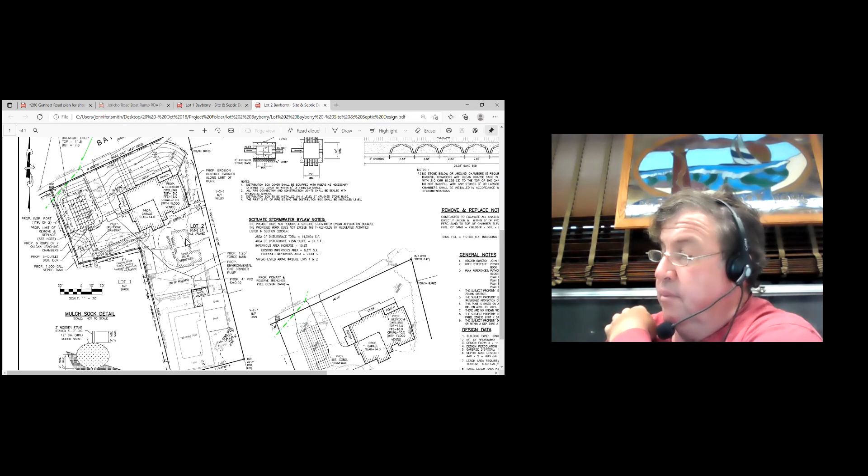So the retaining walls on this one here, lot 2, would be if you were coming up the driveway, there's a retaining wall along the right-hand side. That was to help make up the difference in grade from the driveway to over the septic system. It looks like it's about a 25-foot long retaining wall. It varies from about 6 inches high to about 2 feet high at its maximum.

The second retaining wall at this site is off of the northeast corner of the lot, or corner of the house, excuse me. And you'll see that it extends out at about a 45-degree angle, and that's so that the fill that's in the front yard doesn't wrap around on the side yard. So, you know, we certainly could eliminate that stone wall and pull some of the fill out of the front yard at that location as well. I don't see any problems doing that. Those are the two retaining walls on lot 2.

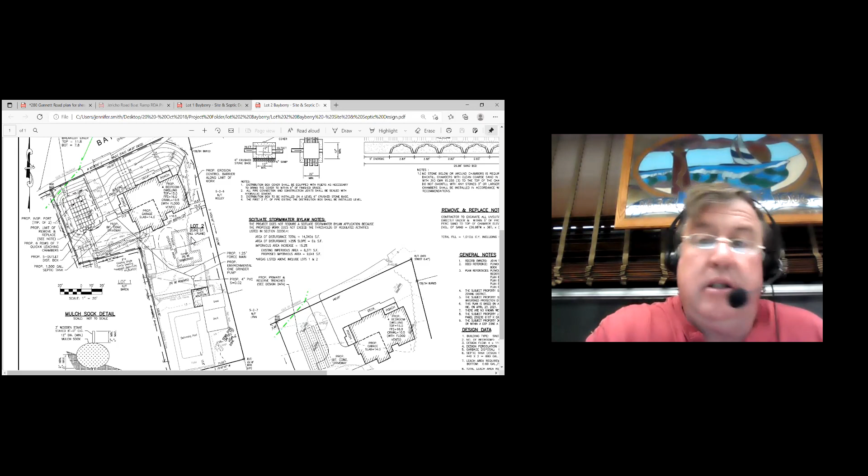Okay. But again, Greg, there's no way to shift some of this runoff coming on that slope, especially... is it lot 2? Lot 2. Yeah.

Cut down some of the fill on that front there. Well, cut it down or create a swale, or run it into some sort of depressed area, just so at least the start of that rain... I mean, you think of the weather we had this year, all that water is just going to run down that slope and right into the driveway.

It seemed to me like before it was pretty flat. I didn't remember it pitching to the road, maybe overall from way back where the pool is, it pitches in that direction, but it seemed like the lawn area as you came around Bayberry was fairly flat in that area. It was almost, it was pretty wet, if I remember. It is, it's low lying.

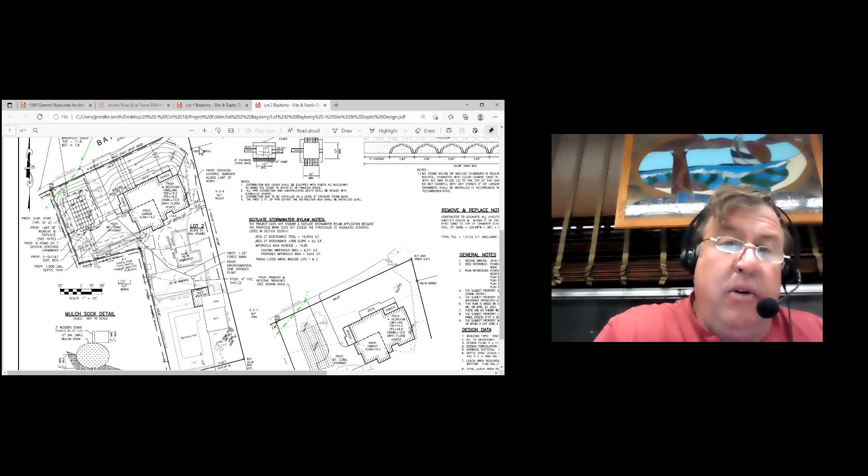So now you're going to build up this house and have at least what, 6 feet of fill? Yeah, or slope going from the grade at the road up to the front of the house. That's what's depicted on the plan here.

I certainly could grade in some sort of depression or some sort of infiltration trench along the front lot line there to help. You know, if you're getting flood water across Bayberry, it's not going to do much of anything. I get that.

But I think what may be better, what would cause water essentially to puddle at that front location in the existing condition, is the water that's coming down the hill from the back of this lot by the swimming pool, coming down the hill and ultimately hitting that low-lying area by Bayberry. We could trap some of that water on the uphill side of the house potentially and hold it at that location as opposed to holding it in the front yard location.

Making up the grade differences with foundations that have to be FEMA compliant, without necessitating the need for retaining walls, results in a steep slope, unfortunately.

The alternative would be to have more foundation showing. So I can look at those options, discuss them with my client, and come back with a revised proposal on how to address some of the stormwater concerns.

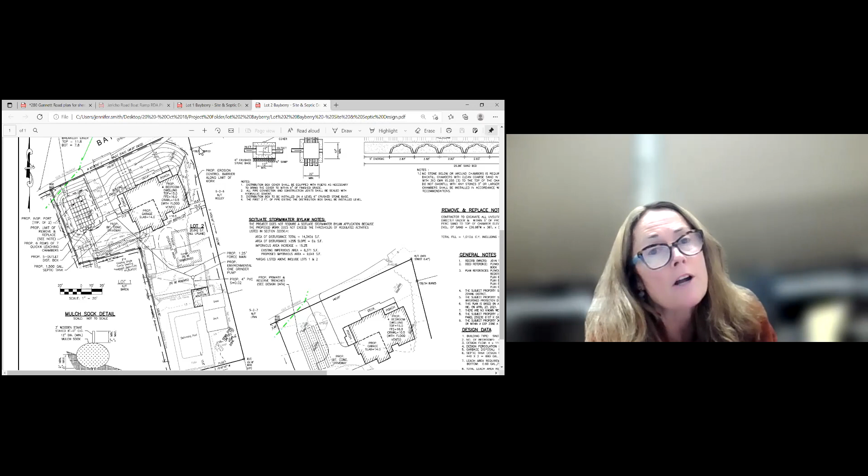Okay, thank you. Do we want to continue this? How far out, Amy? Or Greg, what do we need to put something together? What are the next meeting dates available? December 6th would be a meeting, or the 20th? Of December or November? December. Our next meeting is the 27th, so it's pretty quick. We have a meeting on the 15th of November, which is full. Believe it or not, the 6th is right around the corner. If that's the earliest, I would say December 6th then.

I'll make a motion, Frank, to continue Lot 1 and Lot 2 Bayberry to December 6th. You got a second? A motion from Penny. Do I have a second? I'll second that, that was Doug. All in favor? Jen, yep. Andy, yes. Brendan, yes. And Frank, yes. Great, thank you Greg, thank you very much. Have a good night.

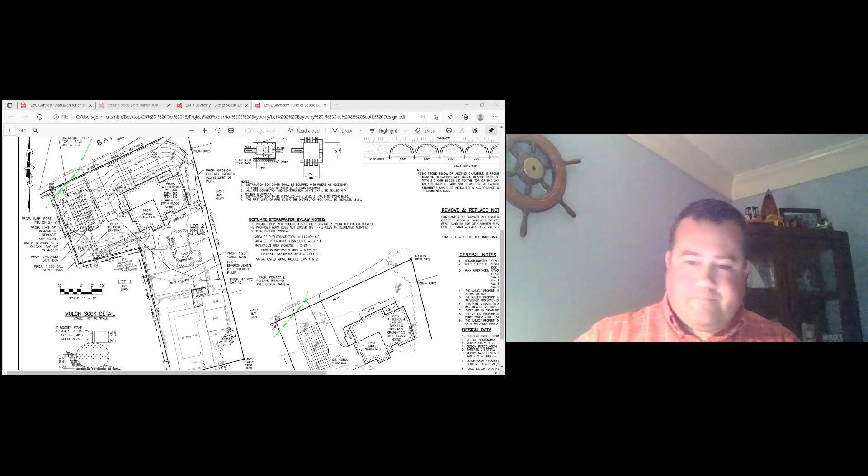So for RDAs, we have 1280 Gannett Road. On October 18th, 2021, during the 5:30 meeting in Town Hall, Scituate Conservation will act on the request of Joseph Lanza for a determination of applicability under the Massachusetts Wetlands Protection Act and the Scituate Wetlands bylaws for activities related to building a shed and installing a fence in the front yard at 1280 Gannett Road, Scituate. Abutters and other interested parties are invited to attend. Information to access the meeting is available on the agenda posted on the town website.

Frank: So this is an after-the-fact filing, and we have the homeowner, Joe Lanza, on the line. Lanza: I'm here, good evening. Good evening, can you hear me? Yep, we can hear you. If you want to just give us a little lowdown on what we have, Mr. Lanza.

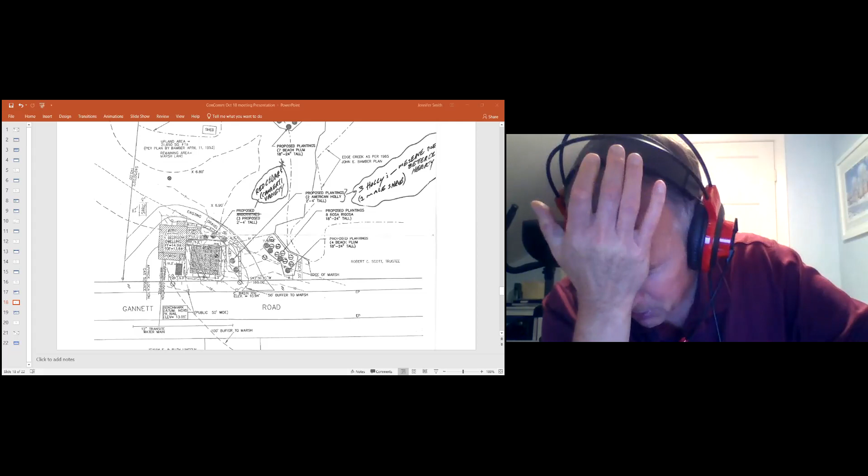You might have mentioned this — what is it, just on cinder blocks? What's the foundation for this shed? Yes, it's on cinder blocks with 6x6 posts to come up, and it's about 2 feet off the ground, so it won't flood. Okay.

Thanks. Do we have anybody in the audience for this? No, Frank.

Do we know how old this plan is? I'm having a hard time reading it on the application. 2006, it says. 2006 for the septic system? Yes, septic system upgrade. I have it right here, April 2nd, 2006. You want to see? No, it's okay, thank you. I have a hard copy in front of me, Frank.

Okay, and so I can see the buffer zones of the 100 and the 50. Yeah.

It would be good to — we're lacking a little bit of information here. It's up on cement blocks or something.

I'm really not sure how much more information we'd need for this. There's sheds all along this street that are much closer. This is really the only place I could put it other than my front yard. It's really out of the way.

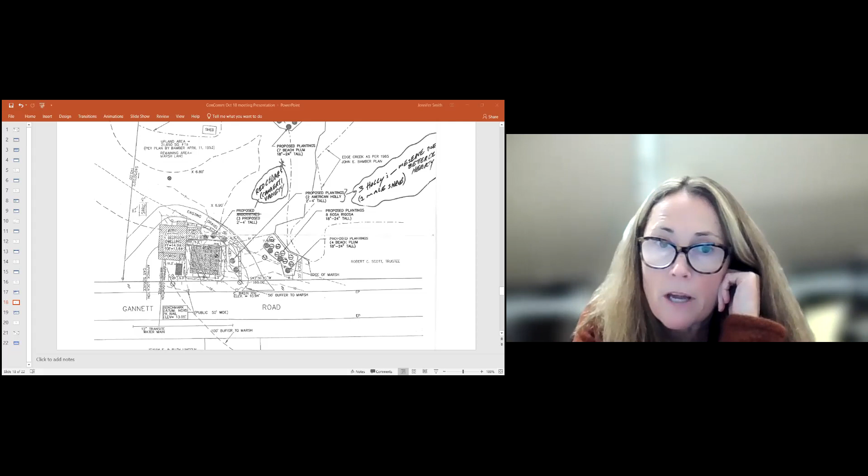But I'm glad that we finally got you on the agenda, Joe, because I think that the shed was observed last spring or something like that, so it's taken a little bit of time to get you on. In the end, a negative finding with a shed on concrete cinder blocks is probably going to be okay, although I do agree with getting an accurate plan. So that was kind of it.

Can I just ask one question? I think, I'm not 100% sure, but I have a feeling that the file, within 5 years, Mr. Lane had been into us about the porch. Now wouldn't that plan be appropriate for this to use?

Driving by there, which I do quite often, I think the shed's fine where it is. It's out of the 50, definitely out of the 50. And I think if we could pull that plan and it's within 5 years, would that be all right for him to use? Yeah, my recollection is that plan, we can pull it and it's within like 3 years. It's like just right before the pandemic, you know what I mean? It wasn't that long ago.

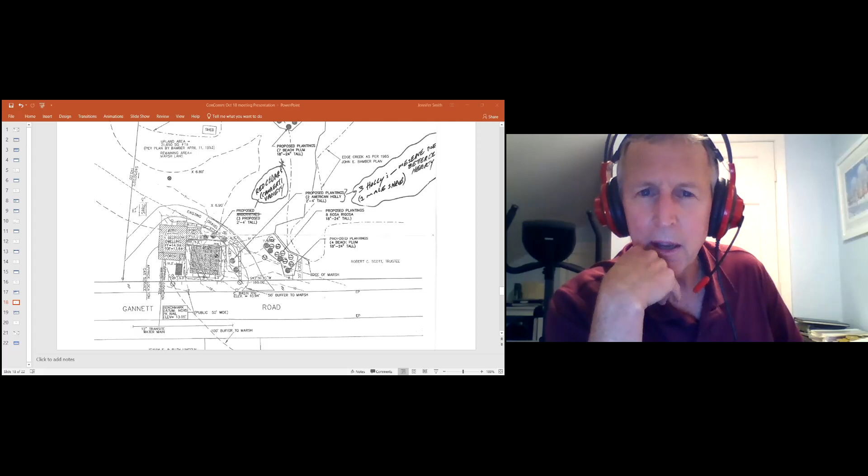The deck was permitted, but I don't believe that point, I mean, that came in as an RDA2 and it came in for like 4 footings, you know what I mean? So it wasn't a highly scrutinized plan. This plan that we're looking at here, can you see the engineer's title block on that? Because this is computer generated, except for the handwritten stuff about the trees and stuff like that.

Solutions, Washington Street, Norwell. Who is it? It says Civil Design Solutions. 145 Washington Street, Norwell, CDS, Mass. Well, that doesn't ring a bell, but if they're still around, they can just reprint this and take off those trees and you got your plan.

Yeah, it shouldn't be. Penny, who did, we really don't need to spend a lot more time on this. It was from Michael Lane. Yeah, the tree part has already been taken care of. I think you guys had another meeting about that because he didn't end up planting them, and there was some time agreement for what wasn't done and what he ended up doing. I mean, he signed off on it, I think, finally, because he had to do that to sell the house and get the permit for the deck.

So I know there was some discussion about that. I remember talking to Mike. So Mike's a friend of mine, so that's how I know these things.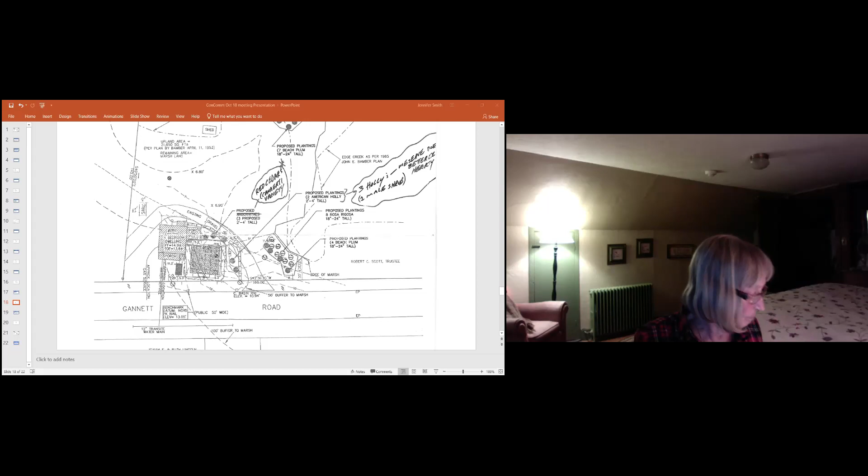Go ahead, I'm inclined to take a motion for negative determination, but as a shed and being where it is, it's not like we're in a real gray area. We're right up against the wetland or something like that. And I hate to see someone spend thousands of dollars for a shed to do a plan for something as simple as that.

When these applications come in that are just sort of pieced together, we spent as much time talking about this as we had 2 houses on, just because it's not clear. I understand what you're saying, Frank. We don't want people spending silly money, but if it had been done before the shed was put in, that would just be a cost that would be associated with doing this correctly to begin with.

If I might just say, I realize that I'm in the buffer zone, and I realize now that inside of 100, you have to ask permission to do anything that has to do with anything, pretty much. But normally, an 8x10 shed is not permitted, and you wouldn't have to. I honestly, when I was building it, I kept it under the size of 120 square feet, thinking that I was staying within the rules. So I wasn't trying to get away with anything. I really thought a shed that I could build 8x12 is not normally permitted. That's all. And you're hardly the first one to do that.

So I think it would be good at some point if you get in and look at your folder, find your most recent delineation and work towards other pieces on the property, including the mowing and whatnot, so that we don't have ongoing issues, I guess would be the.

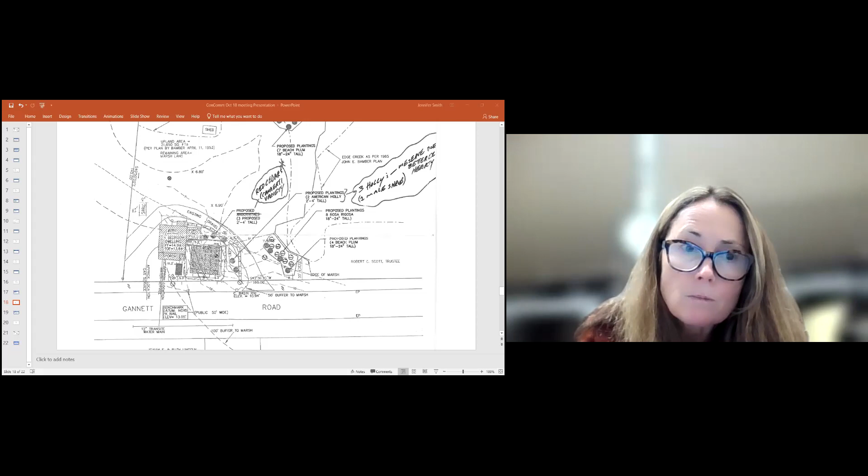It's not going to be rebuilt. I'm just going to re-side it. The siding is awful, it has holes in it. I'm just going to re-side it, not rebuilding it, not moving it. I don't think you can improve it, though. I don't know about that. I'll look it up, but you're just supposed to let it just dilapidate.

My understanding is that I can re-side it and put a roof on it so it doesn't leak anymore. I mean, that's my house. And I don't think we have jurisdiction over that, as long as he's not working in the ground.

I honestly think we've discussed this enough tonight. So you want to go for a negative-3, Frank?

Can I propose - if I don't know if I need an engineer in this, but can we at least get a clean drawing with a measurement off the corner of the house, some measurement, so that we know where it is? I'd be willing to do that. I can find a way to do that.

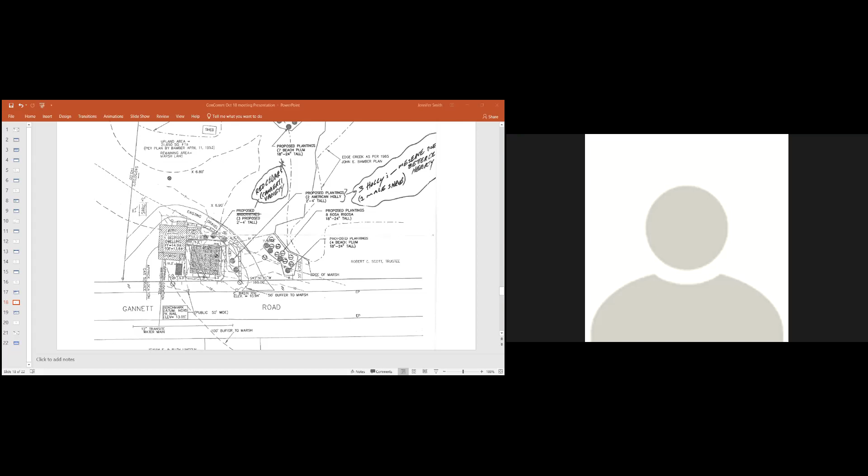All right, so what do we do with that? Why don't we say that negative would be conditioned on having the shed properly located, and maybe Mr. Lanza, you could get in touch, like Amy suggested, with the Board of Health. Let's try to find the cleanest plan that we can to have it on record here. And I hope the takeaway from this is that you understand you're in a sensitive area, and you really need to give some thought to it before you continue.

Yes, okay. That helps. Okay, so I'll make a motion for a negative-3. That's Penny. Do I have a second?

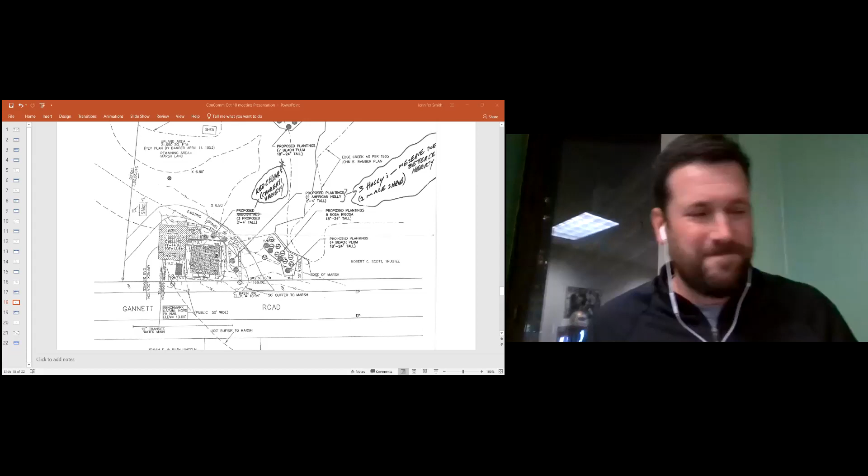Seconded, Brendan. All in favor? Doug, yes. Jen - sorry, I was on mute. Does that negative-3 come with the conditions we talked about? Yes. Okay. Andy, yes. Brendan, yes. Okay, Frank, yes. Great, thank you.

Thanks, Joe. Thank you. On October 18th, 2021, during the 5:30 PM meeting in the Town Hall, the Scituate Conservation Commission will act on the request of the Town of Scituate for a determination of applicability of the Massachusetts Wetlands Protection Act and the Scituate Wetlands bylaws for activity related to installing a timber floating dock and one timber pile at a location at Jericho Road Boat Ramp. Abutters and other interested parties are invited to attend. Information to access the meeting is available on the agenda posted on the website.

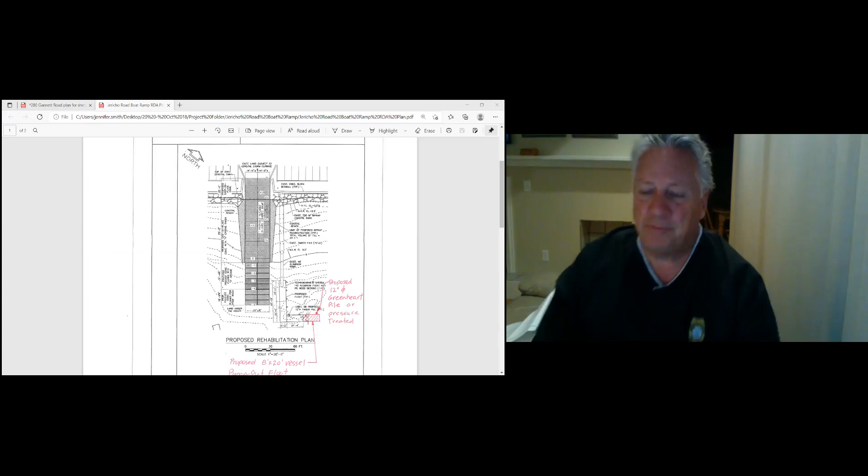So I am unmuting Steve Moan. Oh, Penny? Here he is. Hi, Steve. Hello. How are you? Good, how are you tonight? Good. Never really done one of these, so you're gonna have to help me through it.

Do you want to know what the plan is, what we're talking about? Got a pretty good sketch here, Steve. Maybe you could just enlighten us as to what you need to do. Looks like you're trying to just expand where the boats approach. Yeah, pretty much that's it.

I'm trying to get 2 grants. One is for the float itself and piling, and another is for a pump out station, so that we'd have a second pump out station in the harbor, which would allow boats to pump out at 2 different locations, so that if one station went down, we'd still have another operational, so people don't dump their waste into the harbor.

I think it's a pretty good idea. Me too. So I've been dealing with 3 different state agencies. Doug Cameron, he's on vacation this week, but he is with Fishing and Boating Access. He's in charge of all the state boat ramps. So I presented it to him.

He thought it was a good idea, but he didn't think there was enough room to have the station, which takes up a little bit of space, plus an additional boat to pump out while other people are trying to access the ramp itself. So he asked if we could potentially add a second float and a piling, since these floats get removed in the wintertime and put back in the springtime.

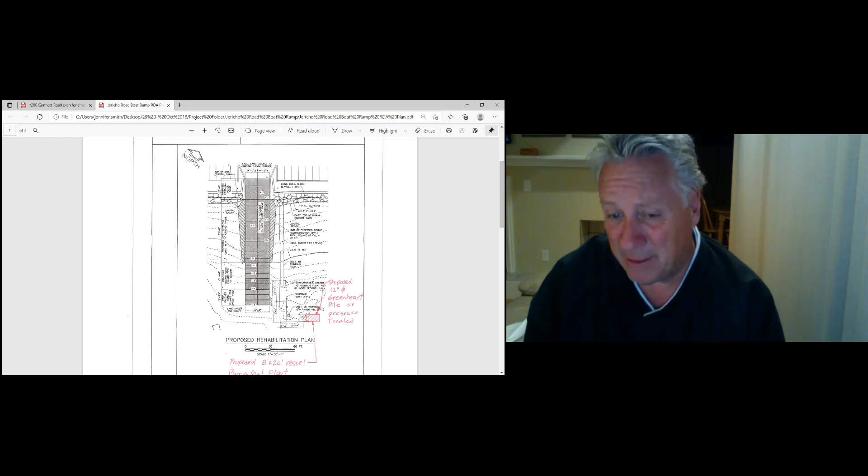And then the third is through CVA, the Clean Vessel Act, another agency that we get grants from for the pump out stations and the pump out boat that we operate. So I think it's really needed. Most big harbors have more than 2 or 3 pump out stations. We have 1 station, and the town has 1 boat.

There is another boat that operates - I don't know what their schedule is or how often they operate - but we do operate our pump out boat most of the summer during the days, as staffing was a little bit difficult this year, as I'm sure you can understand.

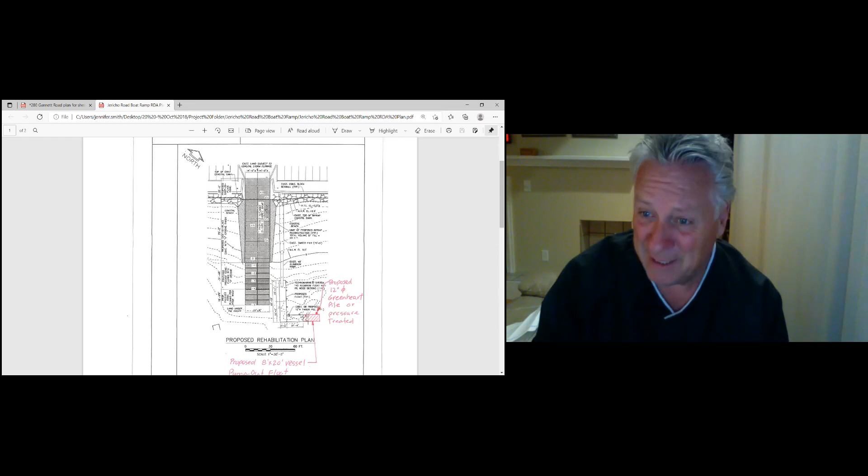So that's where I stand, and that's what we're trying to accomplish. Doug Cameron has filed with Mass DEP for a minor modification. He's filed a self-verification with the Army Corps of Engineers, and then he filed with conservation.

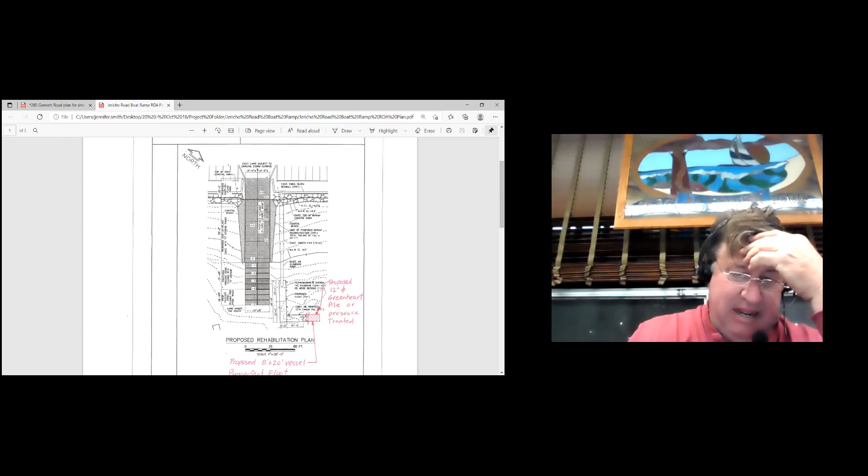Does anybody have any questions? Amy, when it's a minor piece like this, does this go back to chapter 91, or how does that work? Yeah, so that's what Doug Cameron is getting permission from them for, as a minor modification through chapter 91.

Okay, and then I would assume there'd be a lot more if this is going to be a pump station than this. This is kind of like a first phase or something. This is pretty much it, the pump out station.

It's just some piping, and it's going to run across the parking lot. I've had Will from sewer, so it runs up and then out, and then it runs across the parking lot into the sewer lines at Jericho. There's a manhole that it's going to go into. And I had Mr. Costello, is that right? Does that sound right?

He came down and looked at the site, and he spoke with the pump companies that make the pump out station pumps. So right now, we're just looking to get the additional float and pile approved.

I know other members are going to have questions, but so when you're done with this, you're going to have some sort of pump out piece there. It's going to go up the walkway, and then it's going to be a trench across the parking lot. Eventually, yeah, if we get the second grant.

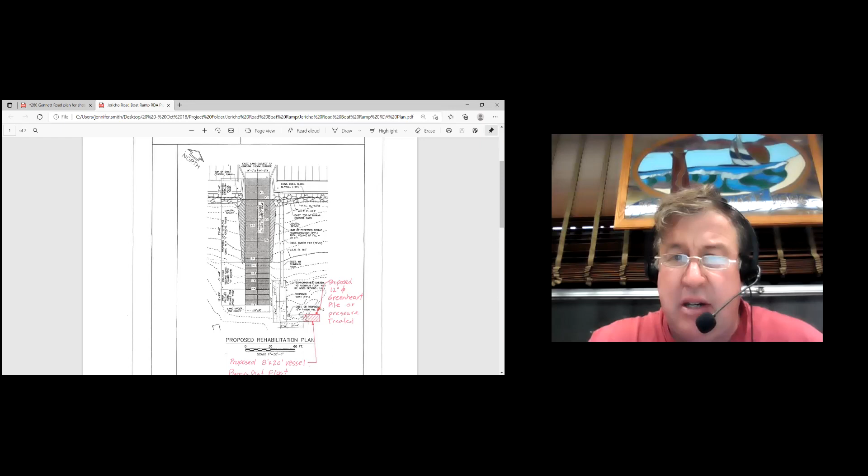Okay, but that would be more involved, I guess. Yeah, I guess so. Again, I'm not an engineer, I don't know. Okay, I'm sorry, I've hogged all the space.

Doug, you want to add anything? I think you covered it pretty well. Right now, it's the float, pretty much the float and the piling. So I don't have any questions on that.

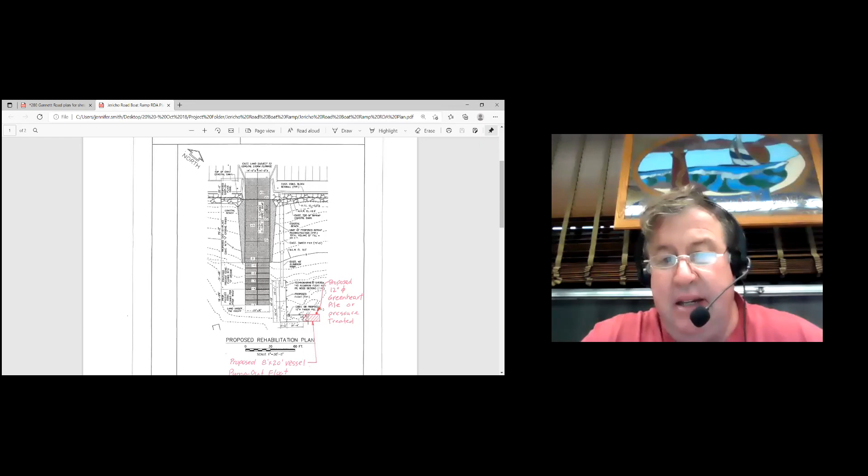Penny? No, I'm all set. Jen? I'm good if Doug is good. Andy, okay, and Brendan, I'm okay as well. Anybody in the audience? No, I see nobody in the audience.

Can I go for a motion then? Yes, I'll second that. All in favor? Doug, yes. Jen, yep. Andy, yes. Frank, yes. Great, thanks Steve.

Thank you very much for your time this evening. I was a little nervous, but... You did great, Steve, thanks. Well, you got to listen to everybody else, so. Oh yeah, it's a lot of fun. Oh yeah, sorry about that, I didn't realize you were at the end of the meeting. No worries, all right. You guys have a great night and keep up the good work. Thank you for your time.

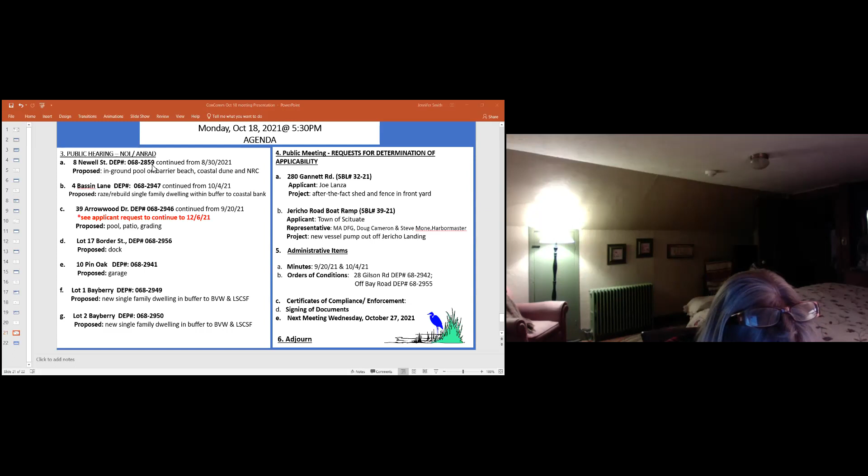Okay, I make a motion we accept the orders of condition as written for 28 Gilson Road and Off Bay Road. 28 Gilson, correct? Yes, 28 Gilson. Okay, I got a motion from Penny. We have a second. I'll second that too. All in favor, Doug? Yes. Jen? Yep. Andy? Yes. Frank, yes. Rolling, okay, that's it for me.

All right, so let's go to liaisons quickly. So I've been doing the coastal advisory for a number of years, and to be quite honest with it, with everything else going on, I would love it if someone else was willing to do that. And there's a lot of moving pieces right now. We've got a new coastal resource person, correct, Amy?

Well, it's moving forward, supposedly. I've heard that the person's been hired, but it's going to be weeks or months before the brand new person is actually out there. At some point.

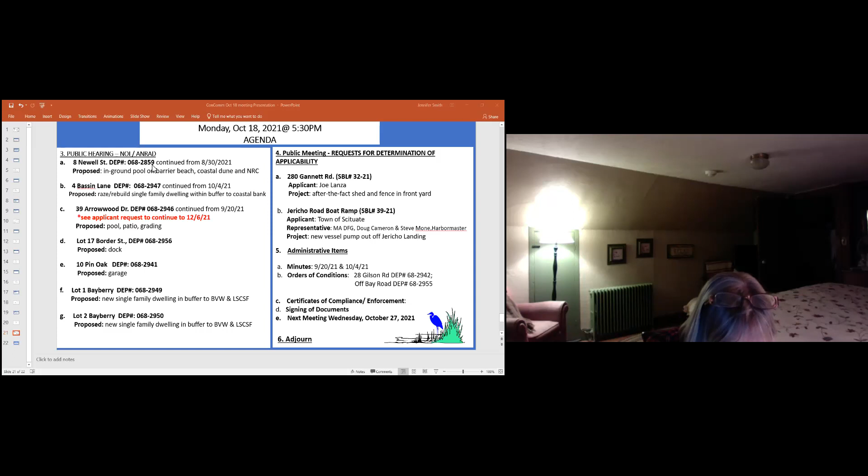We're working with 2 other scouts to figure out their availability and time. Okay, very good. I'm available, we can get you a step ladder and some string for the signs. You're gonna get a step ladder, Penny? I can bring my own ladder.